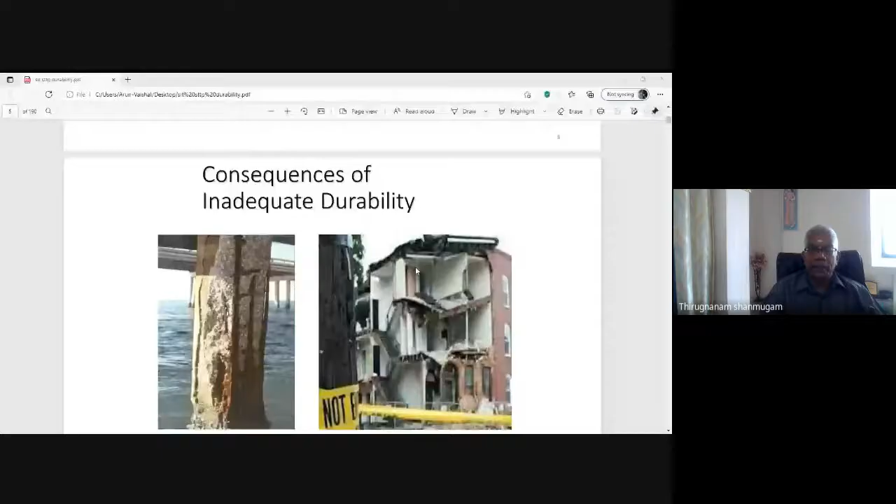Durability of concrete, advanced techniques. So what about the definition? The durability of cement concrete is defined as its ability to resist weathering action, chemical attack, abrasion, or any other process of deterioration. Concrete is normally deteriorated due to time and aggressive environment. So it is the resistance to the process of deterioration — that is the definition for durability. Durable concrete will retain its original form, quality, and serviceability when exposed to its environment.

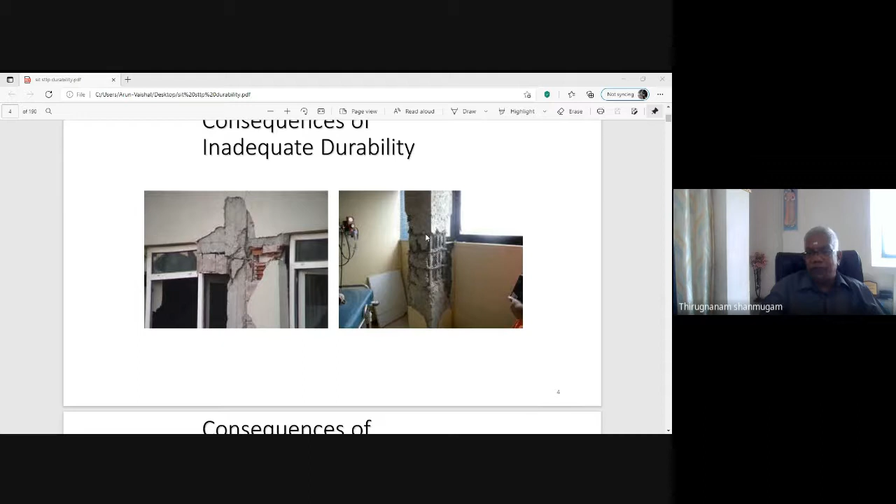These pictures show the consequences of inadequate durability. You can notice the concrete structure has been deteriorated like this — that is the lack of durability. Lack of durability causes spalling of the cover concrete, exposing the reinforcement and interior of the structure, so column bars, ties, etc. are exposed and the cover concrete is completely spalled off. This leads to corrosion of the reinforcement and finally the failure of the structure.

To achieve good durability of reinforced and pre-stressed concrete in aggressive environment, specify high cement content, low water cement ratio, suitable minimum thickness of cover to the reinforcement, and careful curing.

Higher cement content means our code of practice for plain and reinforced cement concrete, IS 456-2000, gives emphasis on durability aspects of concrete. The previous code, IS 456-1978, did not give much focus on durability, but the revised code IS 456-2000 is completely based on durability requirements.

It specifies different types of exposure conditions: mild, moderate, severe, extreme exposure, etc. It gives in tabular form the minimum cement content needed and the maximum water cement ratio. So higher cement content depends upon the exposure condition.

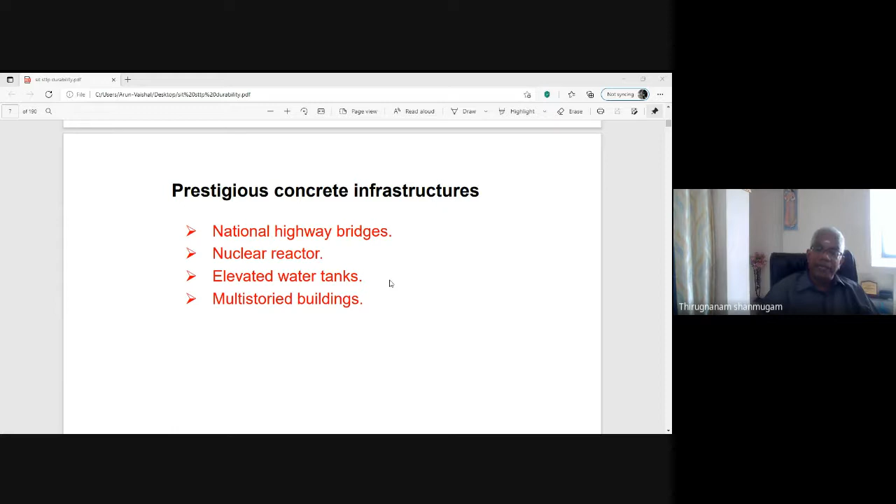So what are all the structures meant for durability? It is meant for all types of concrete structures. Out of these, the prestigious concrete infrastructures include highway bridges, nuclear reactors, elevated water tanks, multi-story buildings, etc. These are all some of the structures.

For example, Mumbai Bandra Worli Bridge is situated in the Arabian Sea in Mumbai, connecting two parts, Bandra and Worli. It is exposed to severe or extreme exposure condition because of the sea water and sea atmosphere. So you have to give importance to the durability of concrete structures.

Similarly, suspension bridges and their concrete portions have to be very carefully designed because the durability of concrete gives longer life to the bridges. Even though the cables are made with steel, steel is also subjected to corrosion. So you have to give durability consideration for the steel, the trussed girders, and the concrete also.

Nuclear reactor: normally we prefer high-performance or high-strength concrete for construction of nuclear reactors. Here, one of the durability requirements is the radiation requirement, because if the concrete is in poor condition, it is subject to radiation. The radiation emitted from the nuclear reactor will affect the people working in the nuclear power plant. So you have to build the nuclear reactor and other containment structures with radiation shielding provided. That is one of the durability requirements.

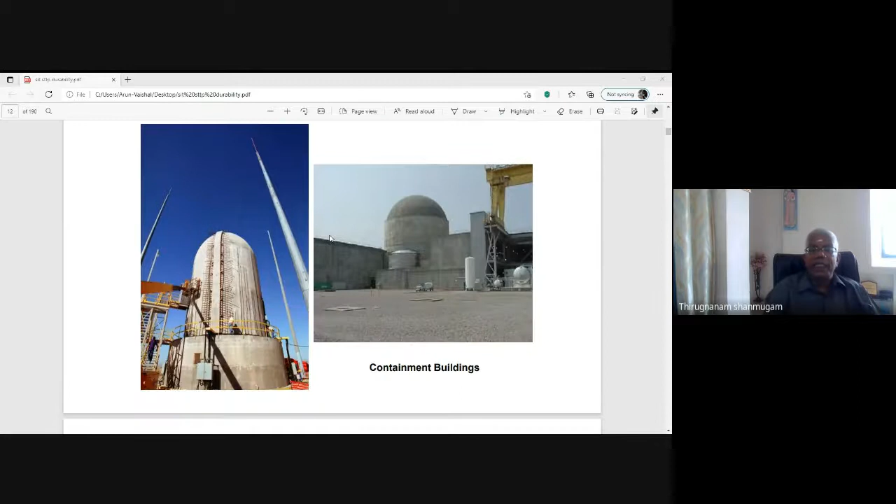This is the view of the containment structures. And multi-story buildings: nowadays multi-story buildings are very common in metropolitan cities. Recently, about a 117-story building has been constructed, or is under construction, in Mumbai.

If the height of the structure goes tall, high-rise structures etc., durability requirement is very important, because Mumbai and other metropolitans, even Calcutta and Chennai, are exposed to the sea atmosphere, as these are coastal metropolitan cities. The modern buildings constructed in cities like Bangalore, Hyderabad, Chennai, or Coimbatore have to be constructed with durable materials, steel and concrete etc.

Buildings exposed to marine environment - the marine environment means the sea atmosphere and sea water, which is a salt-laden atmosphere. These easily affect concrete structures and react with the concrete, deteriorating it. You have to give protection to the concrete structure by arresting the deterioration and disintegration of the concrete.

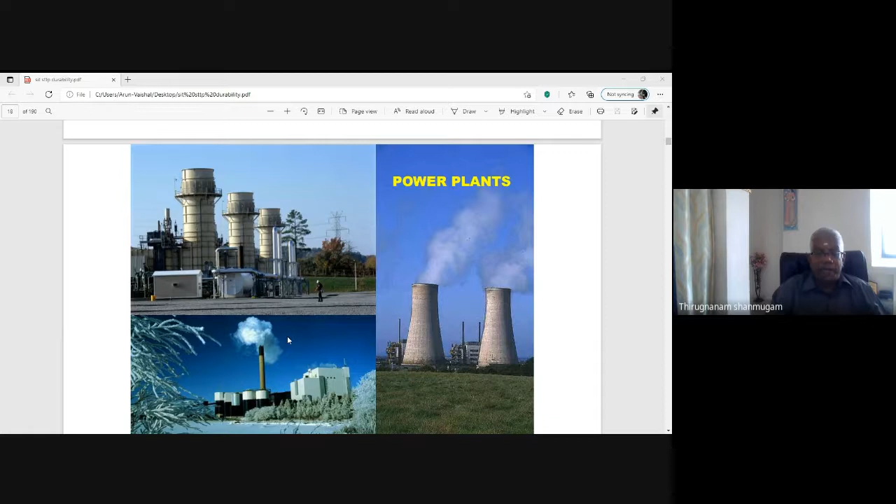Chemical plants, whether manufacturing copper, steel, organic materials, paints, or medicines etc., the chemical ingredients affect the durability of the concrete. So aggressive environment means chemical environment - these structures are exposed to the chemical environment. For example, if sulfuric acid is liberated, it affects the concrete surface and causes disintegration of the concrete structures.

So durability properties are affected by the following factors: impact of water cement ratio on durability, permeability, sulfate attack, chloride attack, corrosion of steel, carbonation of concrete, acid attack, alkali aggregate expansion or reaction, frost action, freezing and thawing action etc. These are all factors affecting the durability properties of concrete.

Let us see one by one. Effect of water cement ratio: there is tremendous change in the microstructure of concrete made with higher water cement ratio versus low water cement ratio. Nowadays SEM (scanning electron microscope) pictures are available showing the microstructure of the concrete elements. Thus we will examine the microstructure with higher and lower water cement ratio.

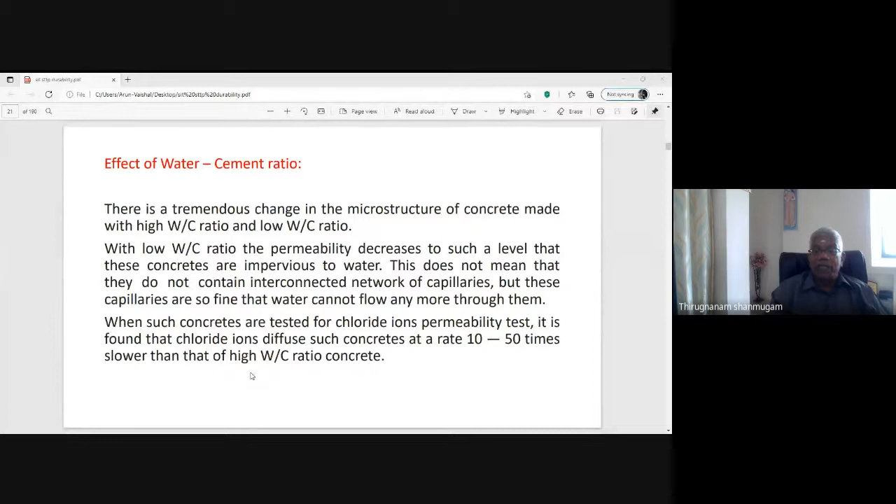Whereas with low water cement ratio concrete, along with some chemical mineral admixture, it reduces or slows the chloride ion diffusion in concrete. So the durability of the concrete is much higher, about 10 to 50 times higher.

It has been proved that low water cement ratio concrete is less sensitive to carbonation, external chemical attack, and other detrimental effects that cause lack of durability of concrete. It has been reported that it becomes impossible to corrode unprotected steel reinforcement in accelerated corrosion tests of concrete with very low water cement ratio, because of the imperviousness of the concrete surface. So when you do accelerated corrosion tests, it is also proved that the rate of corrosion is very, very less when adopting low water cement ratio.

Similarly, with low water cement ratio, you can increase the resistance against carbonation, sulfate attack, chloride attack, alkaline attack, etc., and other detrimental effects which cause lack of durability of concrete. So it could be inferred that the best way to protect reinforcing steel against corrosion is to use low water cement ratio and adequate cover, rather than using higher water cement ratio and then protecting the steel by epoxy coating.

In this context, the strength and workability criteria are completely reversible. If you want strength, you have to reduce the water cement ratio. But reducing the water cement ratio also reduces the workability. So in order to get sufficient workability in place of the concrete, you have to maintain some quantity of water, that is, a higher water cement ratio.

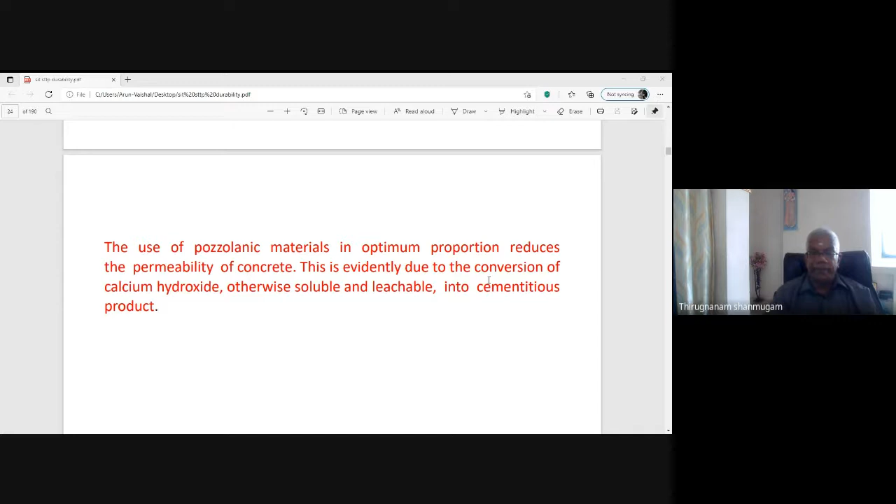Plastic shrinkage cracks occur because water from fresh concrete can be lost by evaporation, absorption by the subgrade, formwork, and the hydration process. During pouring, water is lost by evaporation and by absorption into the subgrade, formwork, and through the hydration reaction of the cement.

A minimum amount of water is needed for completing the hydration action of the cement paste, about 0.25 to 0.3. This amount of water is completely needed and should be available at all times until 100% hydration has taken place. So we have to take care of evaporation loss, absorption loss, etc., by slightly increasing the water content, to 0.35 or 0.4.

If water is lost by evaporation or absorption, the minimum amount of water must still be present for the setting action, that is the hydration action. Otherwise, you have to take care of or arrest the evaporation loss, absorption, formwork loss, or temperature loss.

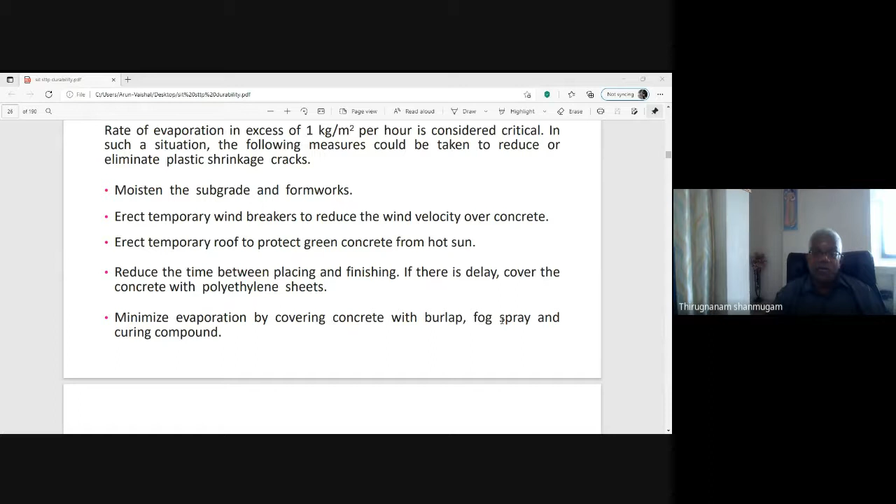Fog is sprayed over the surface of the concrete to reduce the temperature, for the effect of curing. Modern high-grade cement, being finely ground with higher tricalcium silicate content, needs early curing, particularly in

hot weather conditions. If you use OPC 53 grade cement, the fineness of the cement is much more. Because of this, the surface area of the cement particles is very high, and the tricalcium silicate - you can notice the 4 Bogues compounds: dicalcium silicate, tricalcium silicate, calcium aluminate, calcium aluminoferrite, etc. Out of these, tricalcium silicate is important for the strength and protection.

So with higher C3S content, early curing is needed. Early curing means starting the curing after 6 or 8 hours. Normally in practice, we adopt curing after 24 hours or 20 hours, but it is not sufficient for higher C3S content. So you have to start curing early, within 10 hours, especially in hot weather conditions.

Structural members which are thin, with a large surface to volume ratio, such as sun breakers, chajja, etc., need early curing. So if the surface area of the concrete is large, you have to start curing as early as possible.

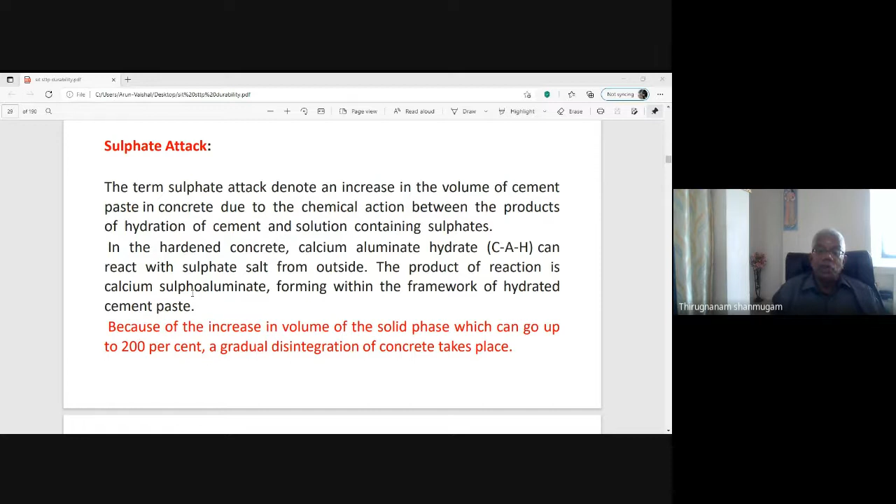Because of the increase in volume of the solid phase - this is calcium sulfoaluminate - which can go up to 200%, a gradual disintegration of the concrete takes place.

The rate of sulfate attack increases with the increase in the strength of the solution. If the external solution is rich in sulfate content, the rate of sulfate attack is greater. A saturated solution of magnesium sulfate can cause serious damage to concrete with a higher water cement ratio in a short period of time.

However, if the concrete is made with low water cement ratio, the concrete can withstand the action of magnesium sulfate for 2 to 3 years. So magnesium sulfate is one of the chemical attacks on concrete in the chemical industries. So if you want durability of the concrete, you have to go for low water cement ratio. Otherwise, if you adopt higher water cement ratio, within a very short time, say after 6 months or 1 year, the concrete is completely disintegrated and deterioration takes place. The concrete is having no durability, lack of durability.

The concentration of sulfate is expressed as the number of parts by weight of sulfate SO3 per million parts. 1000 ppm is considered moderately severe, and 2000 ppm is considered very severe, especially if MgSO4, magnesium sulfate, is the predominant concern. The magnesium sulfate salt normally comes through the water, so the water is strictly subjected to quality control. If the mixing water or curing water contains more than 1000 ppm of sulfate ions, it should not be used, because it is considered moderately severe, and if it exceeds 2000 ppm, very severe, causing deterioration of the concrete.

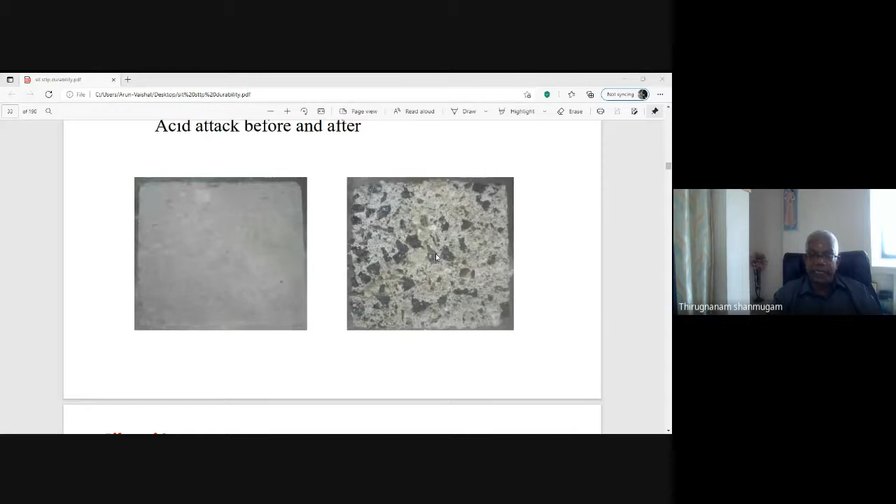This may be seen in this video. This is the surface of the concrete. If the concrete is attacked by hydrochloric acid or any other strong acid, the cement paste is completely leached away, exposing the fine aggregate and coarse aggregate. This concrete is completely deteriorated and it will not give durability.

With sulfuric acid attack, calcium sulfate is formed and can proceed to react with the calcium aluminate phase in cement to form calcium sulfoaluminate, similar to sulfate attack, which on crystallization can cause expansion and disruption of the concrete.

If acid solutions can reach the reinforcing steel through cracks or porosity of concrete, corrosion can occur, which will cause cracking. That is one of the major points in acid attack or chemical attack, sulfate attack, etc. It reaches the reinforcing steel through cracks or porosity of the concrete, so corrosion occurs, which causes cracking of the structure and finally failure of the structure.

Effect of seawater. Rich concrete with low water cement ratio mainly makes the concrete impervious to attack of seawater, and having very little capillary pores does not hold water to cause expansion either by freezing or by crystallization of salt. Rich concrete means cement content is higher. High cement content with low water cement ratio mainly makes the concrete impervious to water as well as to attack of seawater, and having very little capillary pores does not hold water to cause expansion either by freezing or by crystallization of salt.

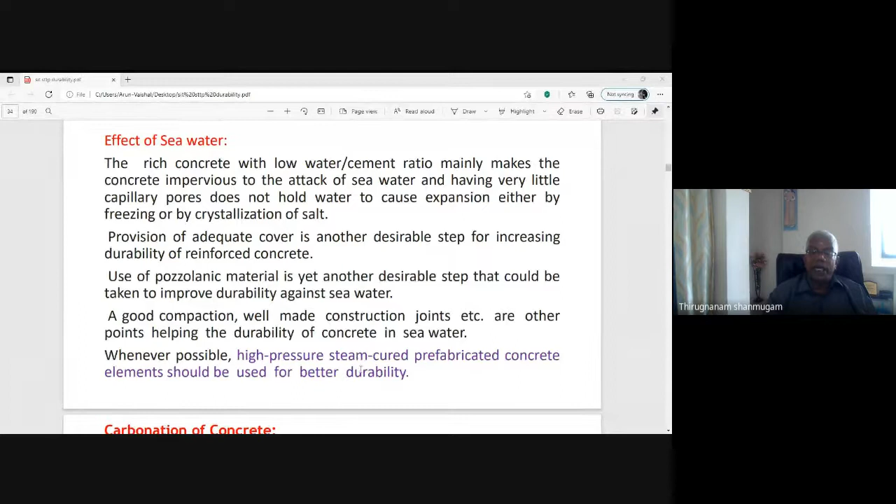High pressure steam cured prefabricated concrete elements should be used for better durability. Prefabricated means the quality of the concrete is very good, and high pressure steam curing means it attains strength as early as possible. 1 or 3 days curing is sufficient to achieve 100% hydration action of the cement, so it should be used for better durability.

Next, carbonation attack on concrete. In the presence of moisture, carbon dioxide present in atmospheric air reacts with water and changes into dilute carbonic acid, which attacks the concrete and reduces its alkalinity.

Normally, the concrete has a pH value of about 13. By carbonation of the concrete, this pH value is reduced to 9 or 8, etc. The pH value of the pore water in the concrete is generally between 12.5 to 13.5, depending upon the alkali content of the cement.

The high alkalinity forms a thin passivating layer around the steel reinforcement and protects it from the action of oxygen and water. This protects the concrete and the steel from corrosion.

If steel is placed in a highly alkaline condition, it is not going to corrode. Such a condition is known as passivation.

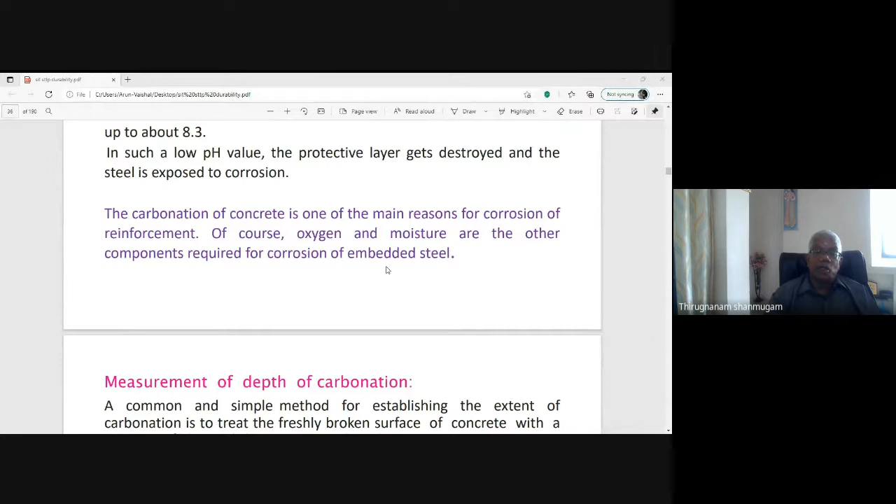Measurement of depth of carbonation: a common and simple method for establishing the extent of carbonation is to treat the freshly broken surface of concrete with a solution of phenolphthalein in diluted alcohol.

If the calcium hydroxide is unaffected by carbon dioxide carbonation, the color turns out to be pink. So pink color formation denotes a very good concrete.

If the concrete is carbonated, it will remain uncolored. So uncolored concrete means the color change is not there, meaning the concrete has been subjected to carbonation, leading to disintegration or corrosion of the reinforcement, etc.

It should be noted that the pink color indicates that enough calcium hydroxide is present, but it may have been carbonated to a lesser extent. So if carbonation is there, it is to a lesser extent and will not lead to corrosion of the reinforcement. The pink color indication is very, very important, and it will show even up to a pH value of about 9.5 or 10.

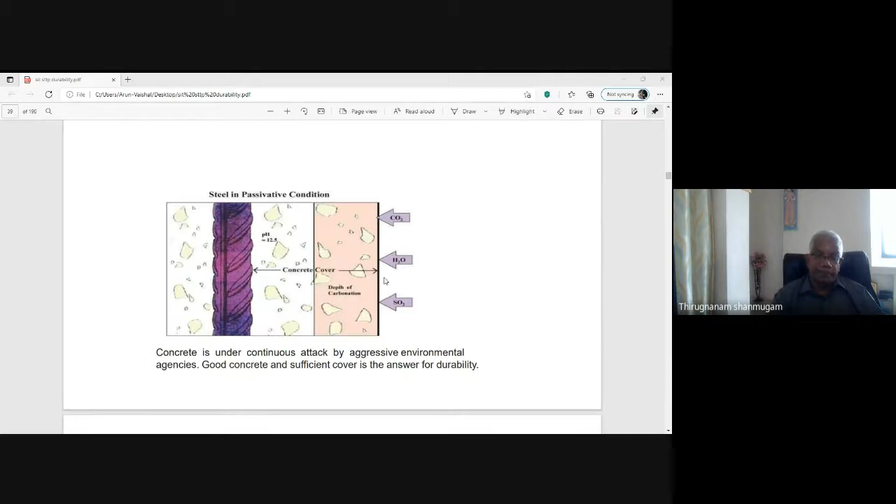Chloride attack is one of the most important aspects for consideration when we deal with the durability of concrete. Chloride attack is particularly important because it primarily causes corrosion of reinforcement.

Statistics have indicated that over 40% of the failure of concrete structures is due to corrosion of reinforcement.

So if you arrest the chloride attack or enhance the durability of the concrete, corrosion of reinforcement is not possible. Once the steel is in a passivative condition or the concrete is in a durable condition, there is no failure of the structure. The structure has a very long life, about 100 years, etc.

So in order to prevent the failure of the structure, you have to avoid the corrosion of reinforcement by providing durable concrete, etc. Due to the high alkalinity of concrete, a protective oxide film is present on the surface of steel reinforcement.

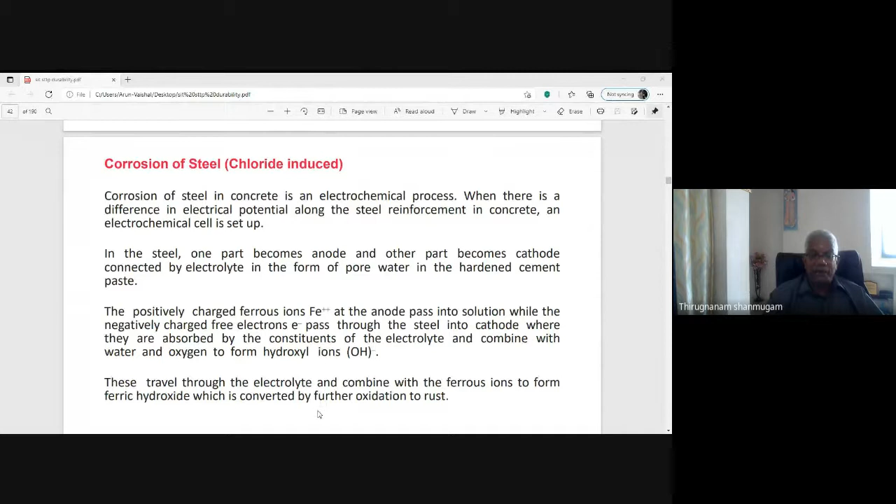So that is the corrosion mechanism. The steel reinforcement, one part is taken as anode and another part is considered as cathode. So anode to cathode and cathode to anode, the current is passing, that is the potential is forming, that produces OH hydroxyl ions in the presence of chloride ions, chloride inducing corrosion.

These are the medium necessary for inducing the reaction, that is oxygen and water. This will include the reaction of the hydroxyl ion, which is flowing through and forming ferrous oxide to ferric oxide, etc., thus causing the rusting of the steel.

It can be noted that no corrosion takes place in concrete that is dry, or probably below relative humidity of 60%, because enough water is not there to promote corrosion. As mentioned earlier, water is a medium necessary for promoting the reaction. So if humidity is below 60%, there will be no corrosion reaction, or you have to maintain the concrete in a dry condition.

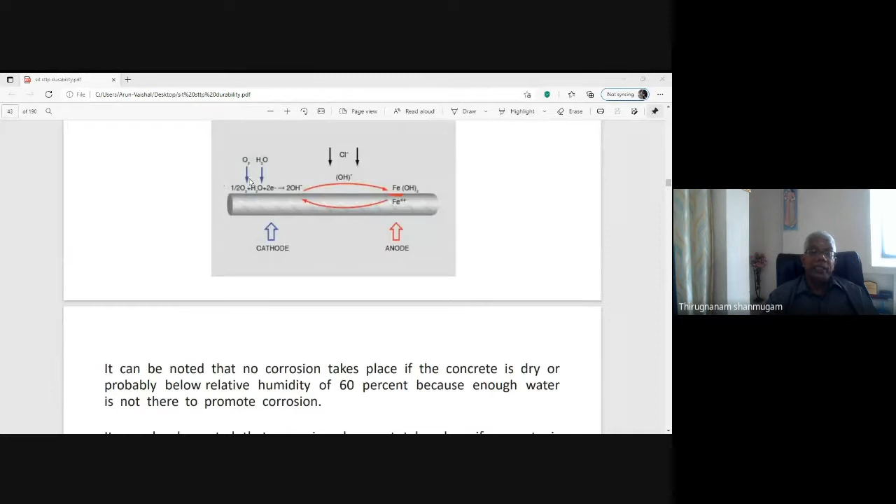It can also be noted that corrosion does not take place if concrete is fully immersed in water, because diffusion of oxygen does not take place into the concrete. Apart from the medium of water, you require another medium, that is oxygen. So if the concrete is completely immersed in water, diffusion of oxygen from the atmosphere into the concrete does not take place. If there is no oxygen, the reaction of the hydroxyl ion is not produced, so corrosion of the steel reinforcement is not possible.

You may think that if reinforced cement concrete is completely immersed in water, there may be corrosion taking place, but corrosion is not taking place because diffusion of oxygen is prevented. There is no oxygen present in the concrete to promote the reaction. Probably the optimum relative humidity for corrosion is 70 to 80%.

The product of corrosion occupies a volume as many as 6 times the original volume of the steel, depending upon the oxidation state. So once rust is formed and graduates into corrosion and corroded steel, the volume of the corroded steel is about 6 times increased. This 6 times increase in volume means the surrounding concrete is completely disintegrated, fallen off, and exposure to external agents is easily possible.

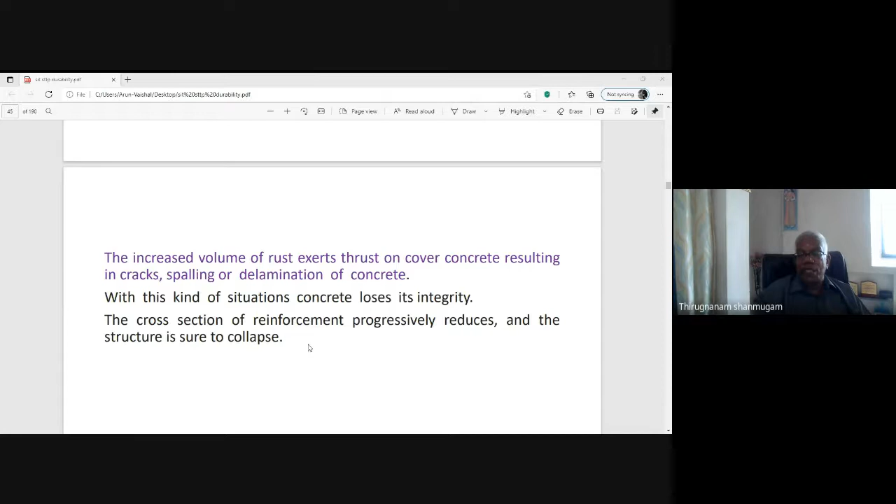The increased volume of rust exerts thrust on the cover concrete, resulting in cracks, spalling, or delamination of concrete. With this situation, concrete loses its integrity and the cross-section of the reinforcement progressively reduces, and the structure is sure to collapse. The cross-section reduces because the diameter reduces from 12 mm to 8 mm, and an 8 mm rod cannot satisfy the load carrying capacity, so the structure fails.

These rust products or corroded products are causing cracks and spalling of the cover concrete. So water, oxygen, carbon dioxide, or other external agents easily attack the surface of the steel. The steel surface is not protected, so corrosion of steel is taking place, and very soon failure of the structure is expected because of the corrosion.

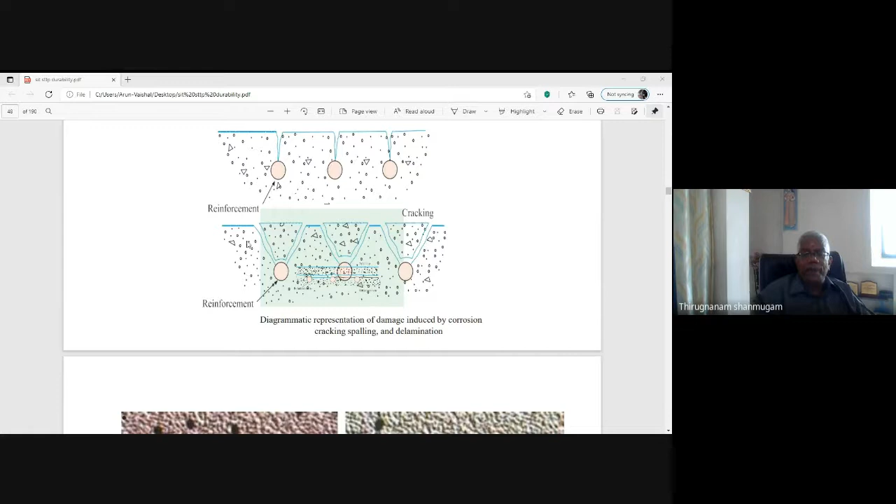Another diagrammatic representation like this. Reinforcement corrosion causes cracking and spalling of the concrete. Finally, delamination takes place, this portion is completely removed, and the steel reinforcement is exposed.

Electromicrograph showing corrosion in poor concrete. If the concrete is poor, chloride ions, carbon dioxide, water, oxygen, etc. are present, and rusting of the steel reinforcement takes place, causing corrosion. The color of the reinforcement changes to reddish.

The same electromicrograph shows no corrosion in good concrete. If the concrete is good, there are no porous sections or capillary pores permitting chloride ions, carbon dioxide, water, oxygen, etc. to enter. So the steel reinforcement is completely protected by this passive film or passive layer, with no external agents. Your steel remains as it is, with no corrosion present.

This photograph represents delamination of the cover concrete. The cover concrete is completely eliminated, and the steel reinforcement cracks due to bursting pressure from rusting of the reinforcement. Example of delamination of the concrete cover on a roof slab. This concrete cover is about 15 mm.

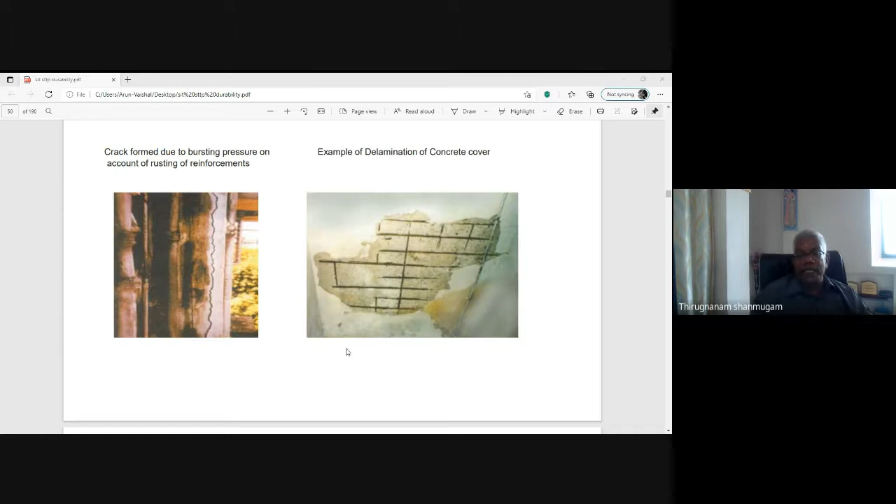Another diagram showing induced corrosion, with cracking and spalling of the concrete, etc. This is the condition of corrosion-ravaged columns. From literature survey and case studies, it has been reported that 40% of structural failures are on account of corrosion of the embedded steel reinforcement in concrete.

Therefore, corrosion control of steel reinforcement is of paramount importance. 40% of failures are due to corrosion, so corrosion control is a very important criterion. First and foremost for corrosion control is good quality concrete through good construction practices.

It is a vast subject touching the fundamentals of choosing constituent materials and good rules to be followed at various stages in the production of concrete. In particular, the use of the lowest possible water cement ratio, having regard to workability, in view of the general availability of superplasticizers, should be used to cut down the water cement ratio and make dense concrete. Normally, according to IS 456 or IS 10262 code practices, 20 mm aggregate requires about 188 liters of water.

That is 188 liters of mixing water. If you use superplasticizer, you can reduce water by 20%. So only 150 liters or 150 kg per cubic meter of water is sufficient for making the concrete. If water is reduced, the water cement ratio is automatically reduced.

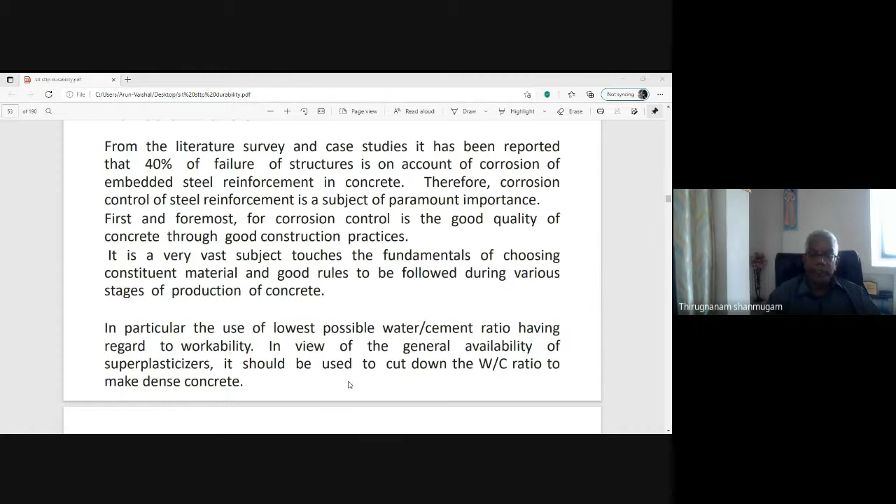This produces good quality concrete for durability purposes. It should be used to cut down the water cement ratio to make dense concrete. Proper mix design, and use of the right quality and quantity of cement for different exposed conditions, should be adopted.

Use of supplementary cementitious materials such as fly ash, ground granulated blast furnace slag (GGBS), silica fume, microsilica, etc. are required, used as admixture mineral mixtures or in the form of blended cement, PPC or blended cement, in addition to the lowest possible water cement ratio to make the concrete dense. So this is the condition.

Use of supplementary cementitious materials or blended cement is required along with lower water cement ratio to make dense or impervious concrete. These materials improve more than one property of concrete, which eventually reduces corrosion of reinforcement. Tests on concrete or mortar containing GGBS have shown that water permeability is reduced by a factor of 100.

So permeability is 100 times lesser; the concrete is completely impervious. It is also reported that 60% GGBS reduces the diffusion of chloride ions into the concrete by as much as 10 times. Chloride ion ingress is also reduced by about 10 times.

Silica fume contributes to all-around improvements in the quality of concrete, which are responsible for reducing corrosion of the steel reinforcement. The micropore structure is very much improved by adding silica fume, which has very, very small micron-sized particles, so corrosion is automatically reduced.

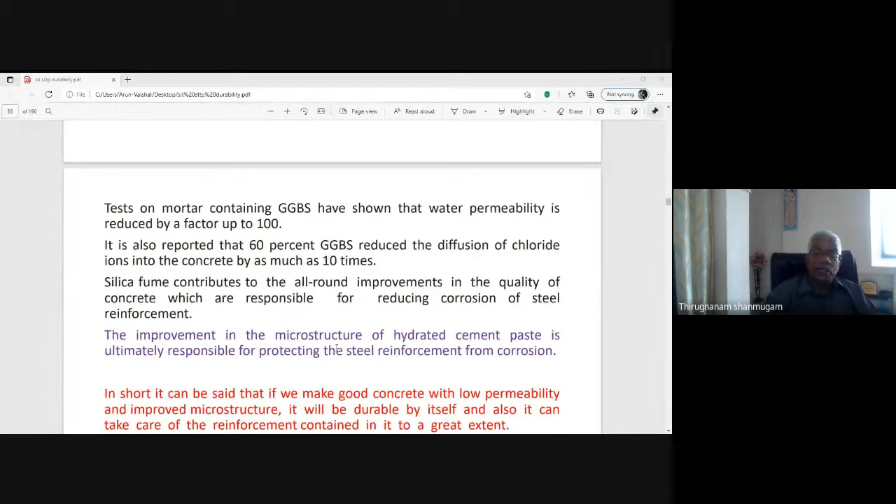The improvement in the microstructure of the hydrated cement paste is ultimately responsible for protecting the steel reinforcement from corrosion.

In short, if we make good concrete with low permeability and improved microstructure, it will be durable by itself and can also protect the reinforcement contained in it to a great extent. If you want longer life of the structure, about 100 or 200 years, you have to prevent corrosion of the steel reinforcement. This will be done by durable concrete—good concrete with low permeability and improved microstructure. That is durable concrete.

It is not always possible to make such ideal concrete, particularly in view of complex environmental and exposure conditions. Further, inherent long-term drying shrinkage and microcracks in concrete make the problems more serious. This demands certain other measures to control corrosion of steel reinforcement.

They are listed as below: metallurgical methods, corrosion inhibitor method, coatings to reinforcement, cathodic protection method, coatings to concrete, and design and detailing. These are the corrosion control methods. We will see them one by one.

Metallurgical methods: steel can be made more corrosion resistant by altering its structure through metallurgical or mechanical processes. Different methods such as rapid quenching of hot bars by a series of water jets, or keeping hot steel bars for a short time in a water bath, and other such processes, can improve the mechanical properties and corrosion resistance of the steel. These are quenching and tempering, etc.—the mechanical or metallurgical processes to improve the properties of steel.

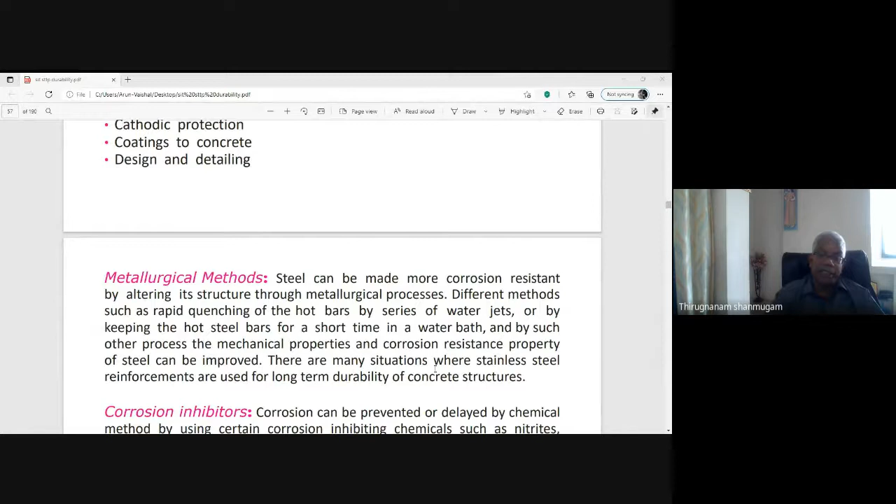The next method is corrosion inhibitor. Corrosion can be prevented or delayed by chemical methods using certain corrosion-inhibiting chemicals such as nitrites, phosphates, benzoates, etc. Of the available materials, the most widely used admixture is based on calcium nitrite.

It is added to the concrete during mixing. The typical dosage is 10 to 30 liters per cubic meter of concrete, depending on the chloride levels in the concrete. One corrosion inhibitor is calcium nitrite. Adding this inhibitor during mixing helps the corrosion resistance mechanism of the concrete.

As mentioned earlier, at high pH the steel is protected by a passivating layer of ferric oxide on its surface. However, this passivating layer also contains some ferrous oxide, which can initiate corrosion when chloride ions reach the steel. The nitrite ions present in the corrosion-inhibiting admixture oxidize this ferrous oxide to ferric oxide, thus stabilizing the passivating layer even in the presence of chloride. So the ferrous oxide is completely converted into ferric oxide by these calcium nitrite ions, stabilizing the passivating layer—meaning there is no corrosion, no chloride attack, no chloride diffusion. The concentration of nitrite must be sufficient to cope with the continuing ingress of chloride ions.

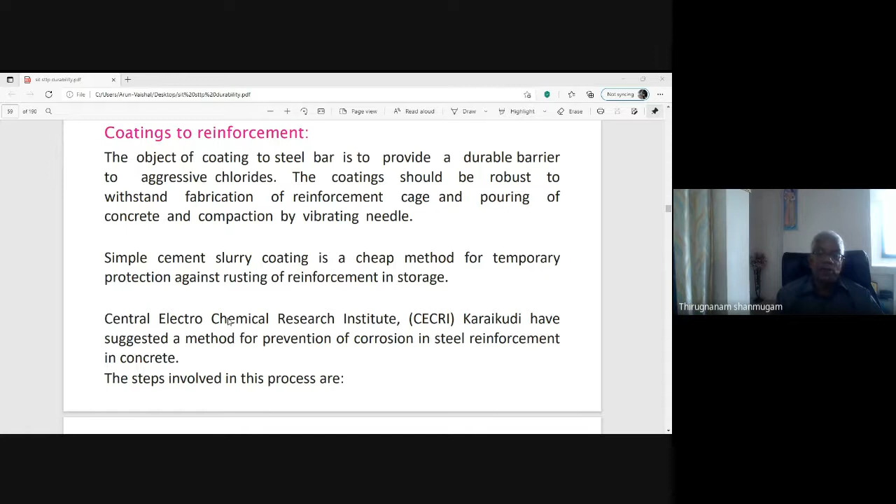Simple cement slurry coating is a cheap method for temporary protection against rusting of reinforcement in storage. The Central Electrochemical Research Institute, Karaikudi, has suggested a method for prevention of corrosion of steel reinforcement. The steps are: de-rusting, phosphating, cement coating, and sealing.

De-rusting: the reinforcements are cleaned with a de-rusting solution. This is followed without delay by cleaning the rods with a wet cloth and cleaning powder. The rods are then rinsed in running water and air-dried.

Phosphate jelly is applied to the bars with a fine brush. The jelly is left for 45 to 60 minutes and then removed with a wet cloth. An inhibitor solution is then brushed over the phosphated surface. For cement coating, a slurry is made by mixing the inhibitor solution with Portland cement and applied on the bar. A sealing solution is brushed on after the rods are air-dried, which has an inside curing effect.

The second coat of slurry is then applied and the bars are air-dried. This cement slurry coating is made by mixing the inhibitor solution with Portland cement and applying it to the bar.

2 coats of sealing solution are applied to the bars in order to seal the micro pores of the cement coat and make it impermeable to corrosive salts. This is the view of the cement polymer composite coated rebars. These polymer coated rebars are stored in the storage yard and then used for fabrication of steel reinforcement for making RCC structures.

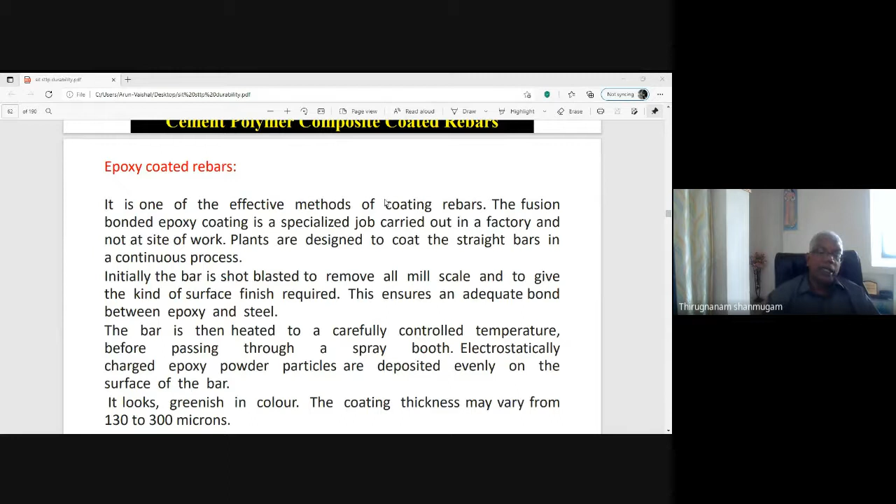The bar is then heated to a carefully controlled temperature before passing through a spray booth. Electrostatically charged epoxy powder particles are deposited evenly on the surface of the bar. It looks greenish in color. The coating thickness may vary from 130 to 300 microns. The thickness of the coating is about 150 microns, 0.15 mm.

Another technique is galvanized reinforcement. Galvanizing of reinforcement consists of dipping the steel bars in molten zinc. This results in a coating of zinc bonded to the surface of the steel. The zinc surface reacts with calcium hydroxide in the concrete to form a passive layer and prevents corrosion. That is why GI steel is provided for the reinforcement.

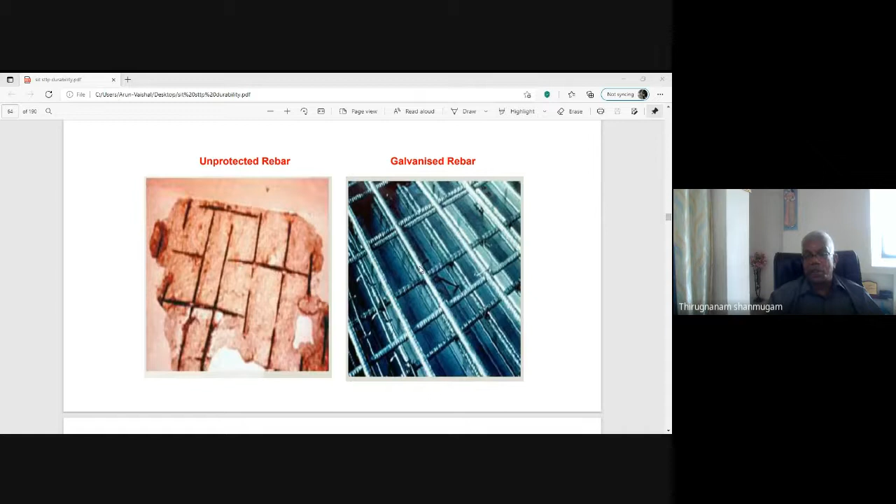In unprotected steel reinforcement, corrosion takes place and spalling of concrete exposes the reinforcement, with rust formed on it. If you provide galvanized steel, there is no corrosion and no rusting action, because of the strong passivity layer provided by the zinc reacting with the calcium hydroxide solution liberated from the hydration and setting action of the cement.

Another method is cathodic protection. It is one of the effective, well-known and extensively used methods for prevention of corrosion in concrete structures in more advanced countries. Due to high cost and the long-term monitoring required, it is not much used in India. Cathodic protection comprises application of impressed current to an electrode laid on the concrete above the steel reinforcement. This electrode serves as a sacrificial anode, and the steel reinforcement, connected to the negative terminal of a DC source, acts as a cathode.

In this process, the external anode is subject to corrosion while the cathodic reinforcement is protected, hence the name cathodic protection, also called sacrificial anode. You provide a sacrificial anode above the reinforcement, and it is completely washed out over time. You have to replace it once in 2 or 3 years, so periodical monitoring is done and the cathodic protection is replaced or provided accordingly.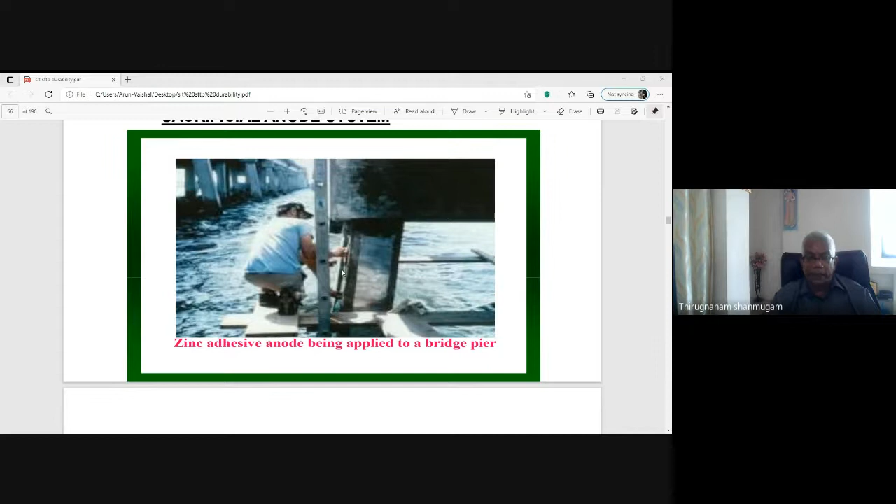In addition to coating the reinforcement, a surface coating is given to the concrete member to increase the durability of all. The coating serves the dual purpose of protection and decoration. Giving protective coatings to major concrete structures such as bridges, flyovers, industrial buildings, and chimneys has become a common specification in India as in other countries. Nowadays, concrete bridges, flyovers and other buildings have decorative coatings.

This protective coating prevents the ingress of external agents, so the durability of concrete is improved. A 4-kilometer long bridge on a national highway at Cochin was recently coated with Emcecolor Flex, a material manufactured by MC Bauchemie Limited. Nowadays, all bridges are coated with these materials.

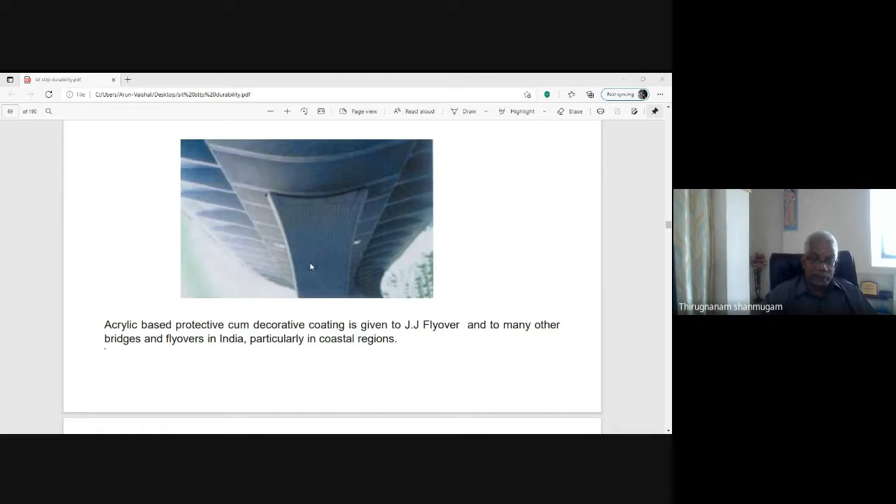So the coating is done on the concrete surface by these people. This is the view of the coating. Acrylic-based protective decorative coating is given to the JJ flyover and many other bridges and flyovers in India, particularly in coastal regions, and also in other areas, to increase the durability of the concrete.

Design and detailing: the structural designer should take all precaution in designing and detailing with respect to spacing between bars for concrete flow between reinforcement, to facilitate vibration of concrete, to give proper cover to the steel reinforcement, and to restrict crack width. You have to follow strictly the codal provisions for detailing of reinforcement according to IS 456 or IS 13920, and strictly adhere to the spacing between the main bars, spacing between stirrups or tie bars, etc.

It facilitates the vibration of concrete to give proper cover to the steel reinforcement, and to restrict the crack width. Closer spacing of the reinforcement means the crack width is automatically reduced.

Nominal cover to reinforcement is applicable to all steel reinforcement, including links. For longitudinal reinforcing bars in a column, nominal cover in any case should not be less than 40 mm or less than the diameter of the bar.

In the case of columns of minimum dimension 200 mm or under, where reinforcing bars do not exceed 12 mm, a nominal cover of 25 mm will be used. So for a slab, if the bar is not exceeding 12 mm diameter, 25 mm cover is sufficient. If the bar diameter is 16 mm or 25 mm, a 40 mm cover is needed, with minimum dimension of 200 mm.

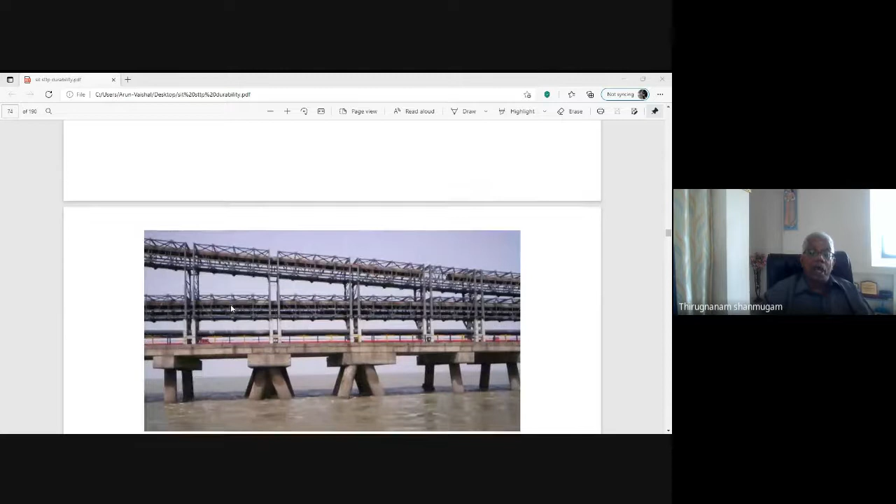What is the importance of corrosion in concrete structures? Consider the concrete platform for conveyor belts and pipelines across the sea for thermal power plants or offshore platforms, for transporting oil, etc. Sometimes the bridge is movable for vehicles, and when vehicles move, cracks develop, and in addition to the seawater, corrosion occurs. So concrete platforms subjected to corrosion activities have high crack widths.

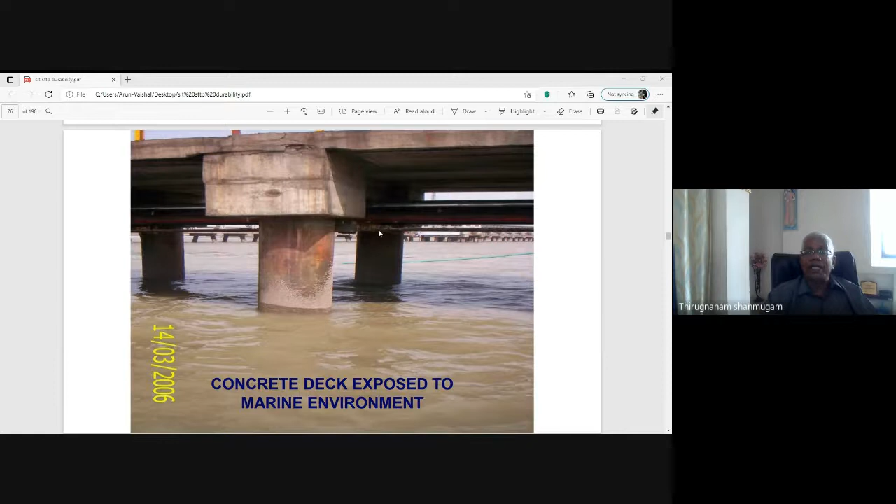Because concrete decks are exposed to marine environments, corrosion takes place, and severe cracks develop at the concrete surface. You have to avoid these cracks. Once the crack widths and corrosion of the steel reinforcement go unnoticed for a long time, finally the failure of the structure takes place due to corrosion of the steel reinforcement.

On the corroded deck, the steel reinforcement becomes visible, and over a period of time it loses its capacity, and finally failure takes place.

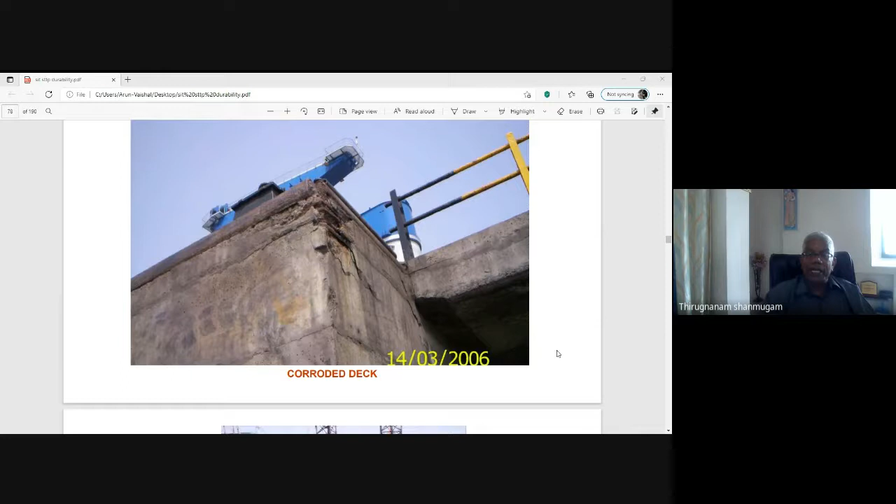Normally, the construction of concrete piles in seawater will be subjected to chloride attack from the sodium chloride ions present in the seawater, so you have to use only durable concrete.

These are some of the experimental investigations taken up at IRTT. One PhD thesis under my guidance is on durability of transmission line tower foundations, done by Christian Johnson. The methodology adopted is design of concrete mix of M20 grade with mineral admixtures to increase the durability of concrete. The specimens are subjected to accelerated corrosion testing to find the initiation of the corrosion period and the corrosion level damage.

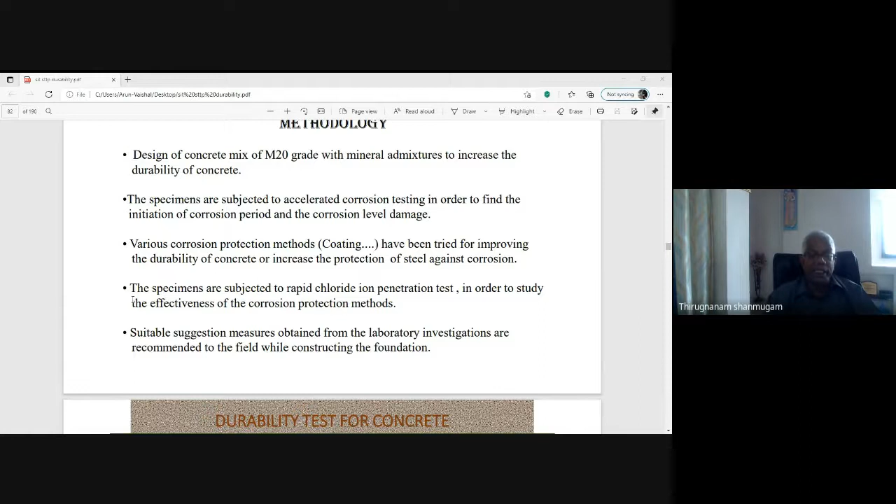Various corrosion protection techniques, such as coatings, have been tried for improving the durability of concrete and increasing the protection of steel against corrosion. The specimens are subjected to rapid chloride ion penetration tests (RCPT) to study the effectiveness of the corrosion protection method, because chloride-induced corrosion is very, very dangerous, and this can be experimented using RCPT tests.

Suitable suggested measures obtained from the laboratory investigations are recommended to the field while constructing the foundation of the transmission tower line.

The specimen is fixed between the two reservoirs using an epoxy bonding agent to make the test setup watertight.

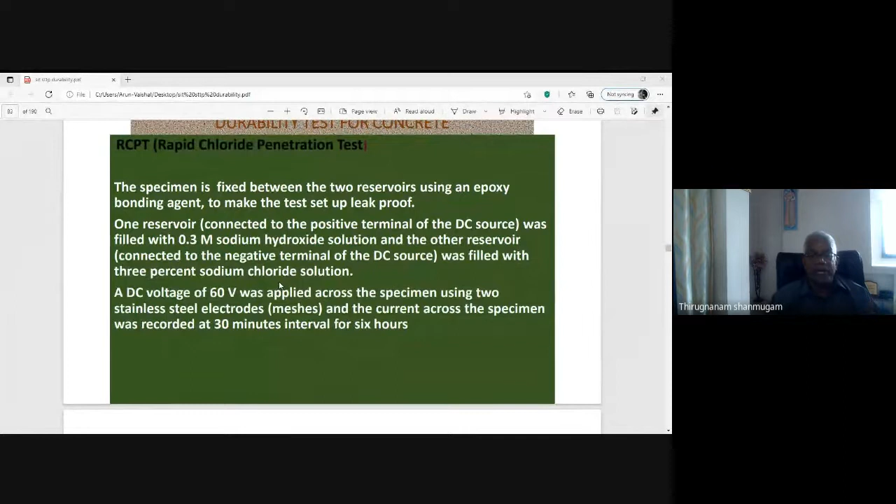One reservoir is connected to the positive terminal of the DC source and filled with 0.3 molar sodium hydroxide (NaOH) solution. The other reservoir is connected to the negative terminal and filled with 3% sodium chloride (NaCl) solution. So there will be a diffusion of chloride ions from one portion to another via the concrete.

A DC voltage of 60 volts was applied across the specimen using two stainless steel electrodes, and the current across the specimen was recorded every 30 minute interval for 6 hours.

Because of this, a chemical reaction takes place and chloride is transferred from this place to that place via the concrete. So the concrete is subjected to chloride ion penetration. That is why it is called the rapid chloride permeability test, RCPT.

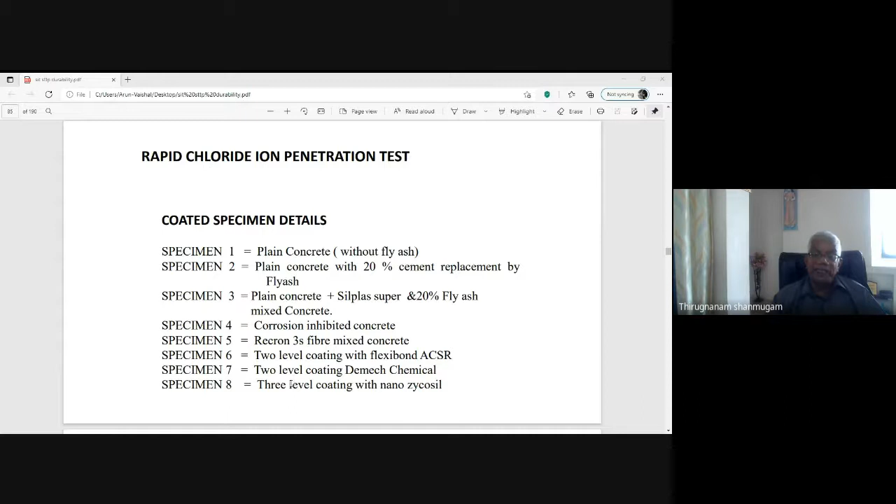Specimens 6 and 7 are provided 2-level coating with Flexibond ACSR, Demech coating on the steel reinforcement as well as on the concrete surface. And there is 3-level coating with nano Zycosil, where the concrete surface is coated with nano Zycosil, the steel surface is coated with another material, and the concrete itself is mixed with mineral and chemical admixtures. That is the 3-level coating.

For the RCPT test, the specimens are cut into small pieces, 100 mm diameter and 50 mm thickness. Here is a closer view of the specimen. These are the specimens with different coatings, placed on the test setup like this.

Now the voltage is applied and the current is passed. The current is measured every 30 minutes, in milliamperes, using a multimeter or impedance meter, up to 6 hours, 360 minutes.

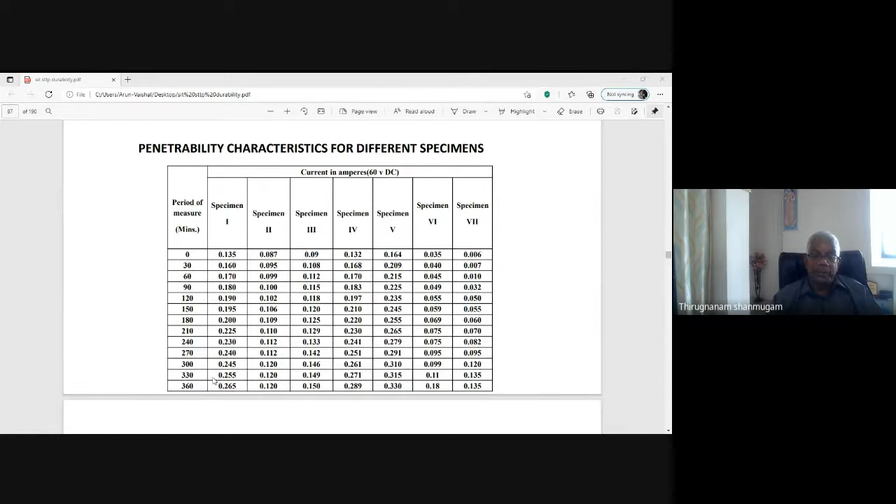The total charge passed during this period was calculated in terms of coulombs using the trapezoidal rule as given in the relevant standard: Q equals 900 times (I0 plus twice I30 plus twice I60 plus ... ) up to the last reading, where Q is the charge passed, I0 is the current immediately after the voltage is applied, and IT is the current at T minutes after the voltage is applied, such as I30 at 30 minutes, I330 at 330 minutes, and so on. This gives the total charge passed in coulombs.

There is a standard given for this test. If the charge passed is above 4000 coulombs, there is high permeability and high penetrability of chloride ion, meaning durability is very low and chloride ions easily penetrate the concrete. 2000 to 4000 is moderate penetrability, 1000 to 2000 is low permeability, 100 to 1000 is very low permeability, and less than 100 is negligible. This is the standard. So we should design concrete with negligible or very low permeability, and avoid high or moderate permeability.

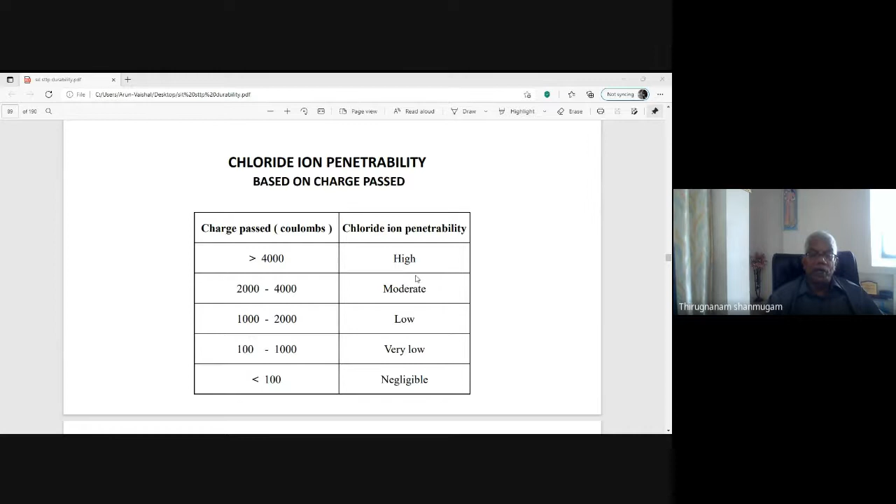Our experiment shows that for the controlled specimen, the total charge passed is about 4000, indicating high penetrability.

If admixture is used, there is slightly less, moderate permeability, around 2000. If both mineral admixture and superplasticizer or chemical admixtures are used, it gives more or less the same result, around 2000, moderate penetrability. If corrosion inhibitor is used, it does not affect chloride ion penetrability at all; it is only for corrosion resistance, not chloride ion penetration, so once again high penetrability is observed.

When Recron 3S polyester fibers are added, this also does not improve resistance to penetrability. In fact it is much higher because of the large number of voids created, making permeability much higher than conventional concrete, and hence the Q value much higher, indicating high permeability and penetrability.

But if you provide 2-level or 3-level coatings, the values fall under the low category, less than 2000. Using nano Zycosil brings penetrability below 1000, which is very low and good. So specimen 8, with 3-level coating using nano Zycosil, is adopted for highly aggressive environment regions to protect the steel products.

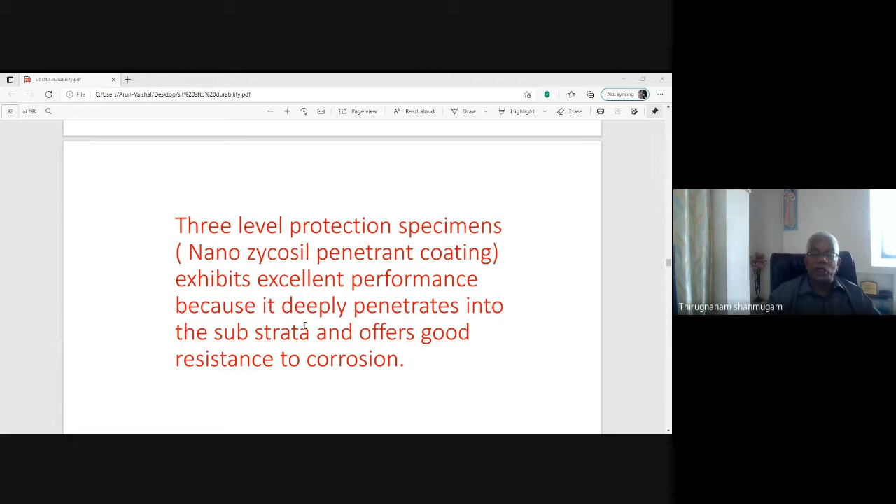Accelerated corrosion test: the half cell is a hollow tube containing a copper electrode immersed in copper sulfate solution. The bottom of the tube is open and covered with a sponge material. The copper sulfate solution permeates through the sponge, which can then be placed on a concrete surface, allowing the electrical potential to be measured.

The objective of the method is to measure the voltage difference between the rebar and the concrete over the rebar. Large negative voltages, minus 350 millivolts, indicate that corrosion may be taking place. Voltages smaller than 200 millivolts generally mean corrosion is not taking place. A typical half cell setup is shown in the figure.

This is a view: concrete surface, reinforcing bar. This reinforcing bar is connected by means of a wire to the high impedance voltmeter's positive terminal. The surface of the concrete has this half cell potentiometer, sponge material for the penetration of the fluid, and this electrode is connected to the negative terminal.

So there is an indication in millivolts. This is the multimeter or voltmeter; it gives the indication. This is the half cell potentiometer setup.

Now, the specimens are concrete specimens, cylindrical concrete specimens cast with steel angles or steel rods embedded up to a certain depth. These steel rods are connected by means of wires to the positive terminal of the voltmeter.

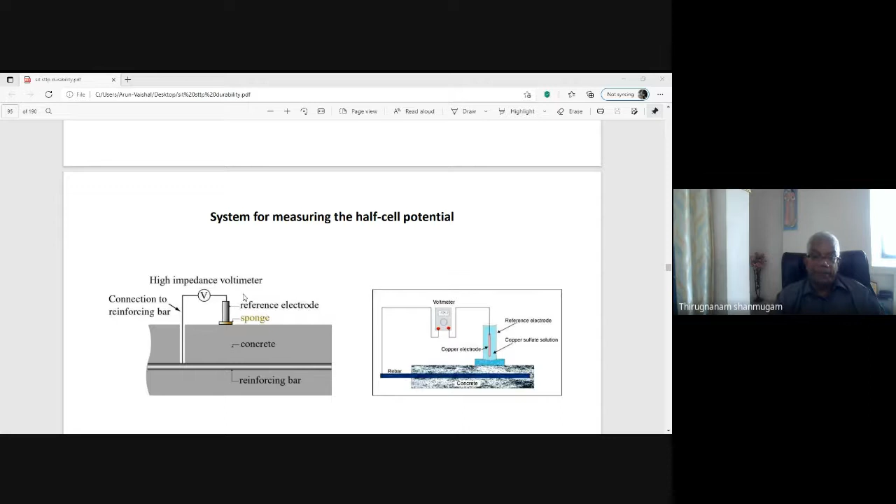Sorry, it is the power part, DC power part. 12 volt current is applied, and it is measured by means of a digital or analog multimeter. One surface is touching the steel surface, and the other is through the half cell.

This consists of a copper electrode and copper sulfate solution, and this copper sulfate solution passes through the concrete electrolyte, completing the electric half cell. Because of this complete cell action, this reading is taking place: 148. 148 means there is no corrosion at all.

Another technique is the impressed voltage technique. This is also an accelerated corrosion test, but here we measure only the current. The variation in development of corrosion current was monitored at regular intervals using a high impedance multimeter, giving the time required to evaluate the relative resistance of the coating material against chloride ingress and subsequent corrosion.

Another test is the applied voltage test. The effect of electrical and electrochemical resistance on the bond of the coating material to steel, and the film integrity of the coating, shall be assessed. A non-conductive plastic material shall be used for the vessel, or for lining a metallic vessel.

The cathode and the anode shall be the reinforcing bar or angle coated with the proposed material. The electrolyte shall be an aqueous solution of 7% NaCl. A potential of 2 volts shall be applied.

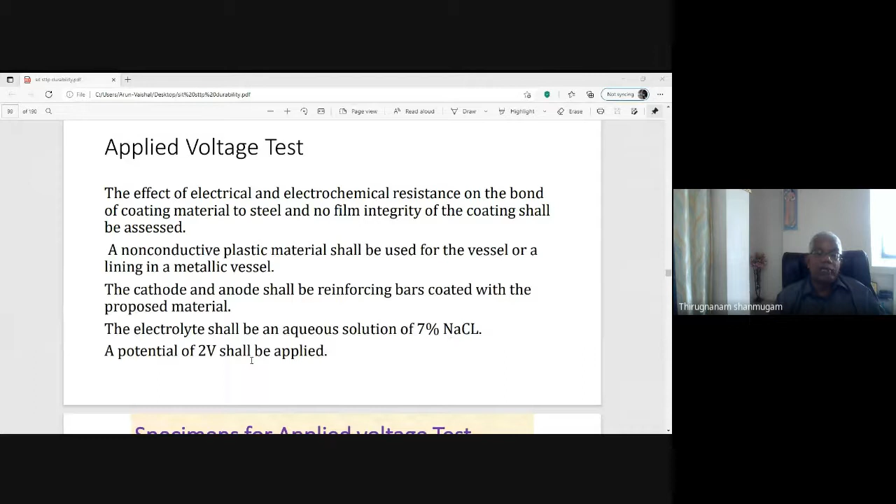For a good coating film, no film failure should be evidenced by evolution of hydrogen gas at the cathode or appearance of corrosion products of iron at the anode during the first hour of testing. So, by application of 2 volt current, if we cannot notice hydrogen gas evolution at the cathode or corrosion products of iron at the anode, it will be a good coating material.

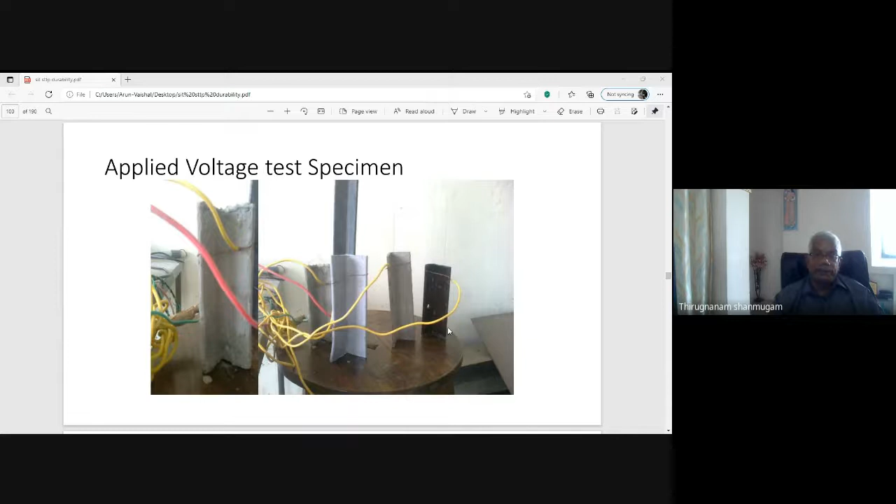So this is the schematic diagram, a pictorial view of the specimens connected to the voltage system. These specimens are inserted in a solution of water, 7% sodium chloride solution, for a particular time.

The chemical resistance setup is evaluated by immersing coated reinforcing steel angles in each of the following: distilled water, 3 molar aqueous solution of calcium chloride, and 3 molar aqueous solution of sodium hydroxide.

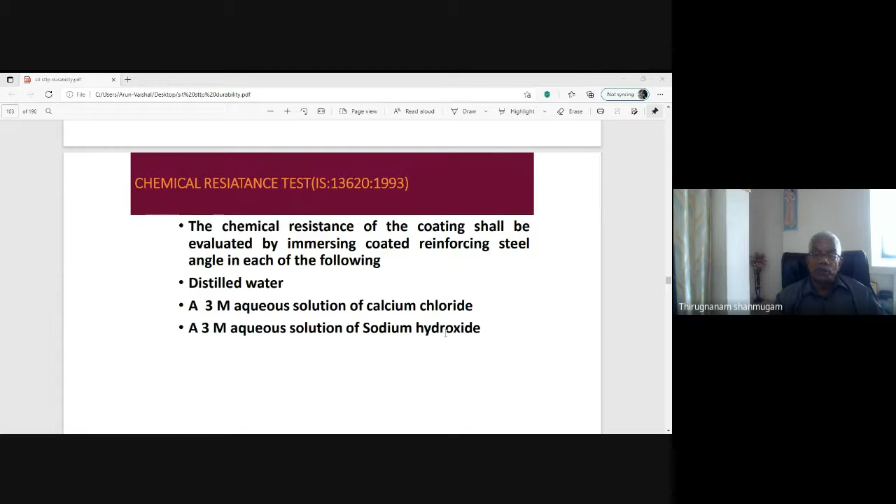So these are the coated angles, immersed in the solution. The result is the performance index point calculated according to the codal practice IS 13620. The code is IS 13620. Performance points are calculated.

You can plot that. Plain uncoated angles have only a performance index of 10, whereas the Demech coating is up to 20 against 3 molar sodium hydroxide solution, and similarly FACSR and CSC cement slurry coated, etc. are also present. The performance of epoxy coating is slightly less.

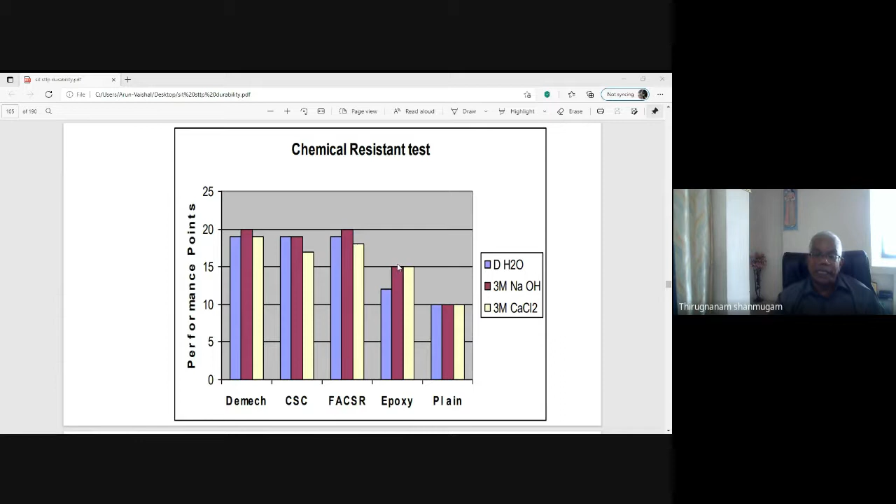That is another investigation with different coatings: plain angle plus plain concrete, plain angle plus admixed concrete, coated angle plus admixed concrete, coated angle plus conventional concrete, plain angle plus conventional concrete plus external coated bar, etc., up to CS10. Different types of variables are available.

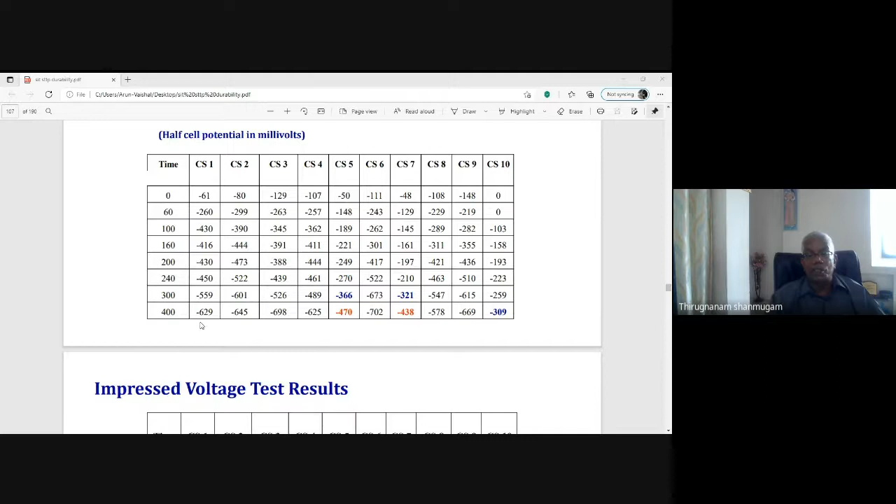Similarly, impressed voltage readings also indicate that coated angles with 2-level or 3-level coating give performance index results as per this. Applied voltage type of coating: 2-level or 3-level coating with cement slurry or chemical coating, epoxy coating, plain angle, or uncoated angle.

Similarly, if epoxy coating is provided, this is restricted to light rust, and a light evolution of hydrogen gas, but it is still present. But for other coatings, with chemical coating or cement slurry coating, there are no corrosion products of iron at the anode level, and no evolution of hydrogen gas at the cathode level, as per the previous indications.

Now a transmission light tower is fabricated as a model, and the 4 legs of the tower foundation are cast. This foundation is subjected to different coating levels - coating to steel, coating to concrete, with admixture concrete, with some modification, etc. It is subjected to accelerated corrosion by dipping into a 3.5% NaCl solution, and with the help of a DC power pack, corrosion is induced.

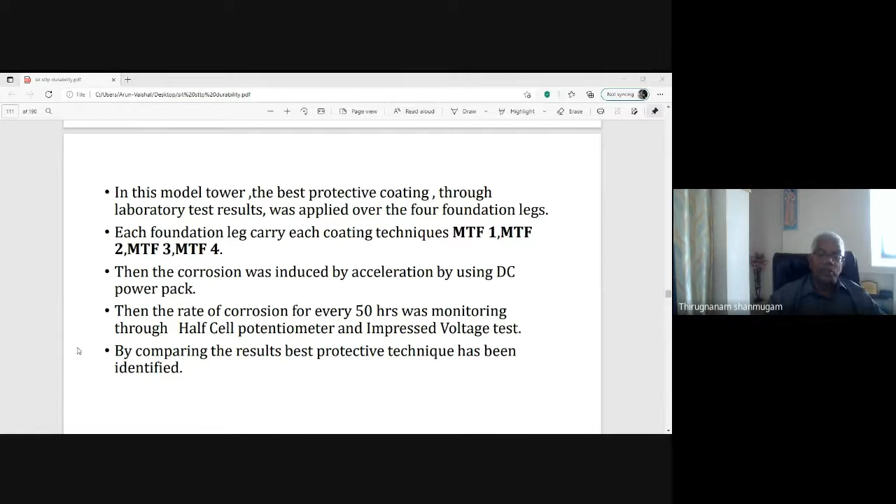In this model tower, the best protective coating identified through laboratory tests was applied over the foundation legs - different coatings MTF 1, 2, 3, 4, etc., representing different coating levels. Corrosion was induced by acceleration using the DC power pack. Rate of corrosion for every 50 hours was monitored through a half-cell potentiometer reading. By comparing the results, the best protective coating technique has been identified.

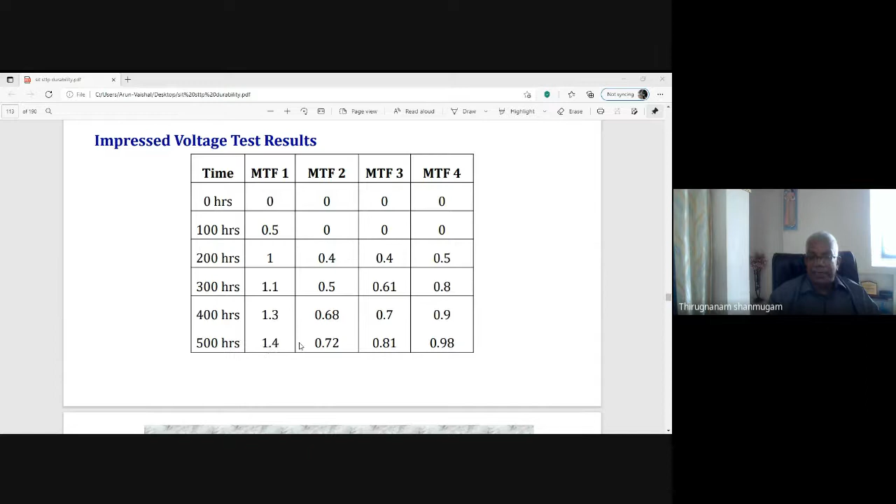Effectiveness of protection: the inclusion of corrosion inhibitor delays the initiation period considerably. 3-level protection for the legs of the model tower exhibits no corrosion even up to 500 hours of accelerated corrosion. The leg coated with nano-zirconium penetrating coating is not at all affected by the corrosion mechanism.

So it is concluded and recommended that there is a need for applying 3-level coatings like polymer-based coating on the stub angle, addition of fly ash by replacing cement by 20%, addition of superplasticizer in the concrete about 1%, and surface coating to the concrete surface by chemical FACSR or Demech or any other coating in the legs of the transmission line tower foundation to increase the durability of the tower foundation.

So in order to increase the durability of the tower foundation, we have to adopt a 3-level coating method. One is coating to the angle, another is coating to the surface of the concrete, and third is durable concrete.

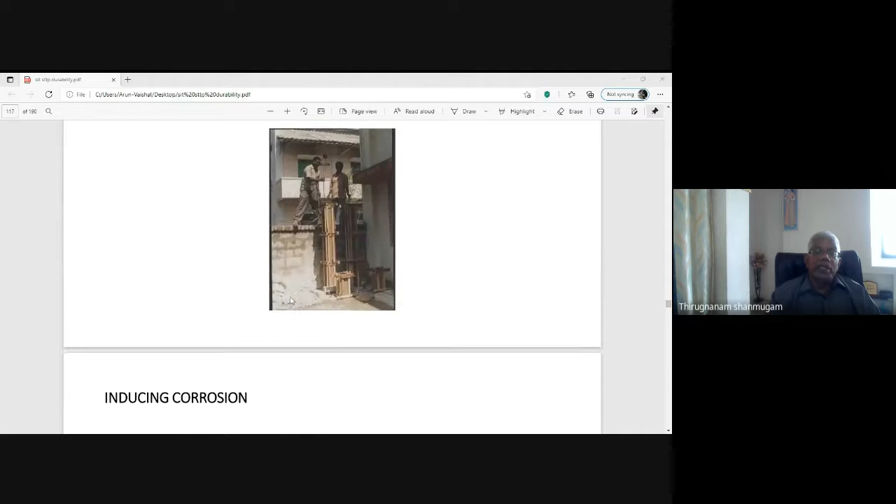Another experimental investigation: a reinforced concrete column is specified and subjected to corrosion in a corrosion chamber. Using a DC power pack, corrosion is induced and rust formation takes place. The reinforcement inside the columns is heavily corroded, with visible leaching of corroded products. After that, the columns are tested in the compression testing machine, both short columns and long columns, to assess the structural behavior of the corroded columns.

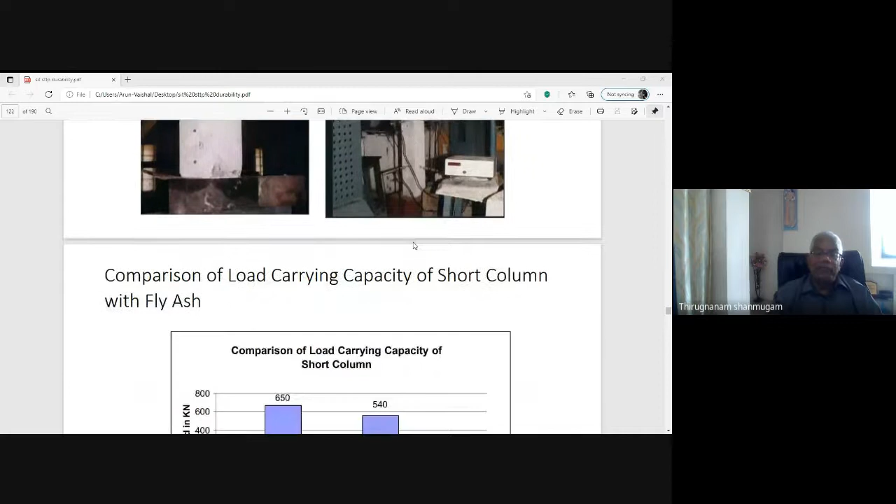This figure shows that the uncorroded column has an ultimate load carrying capacity of 650 kN, whereas the corroded column has only 540 kN. So the load carrying capacity of the column is highly reduced.

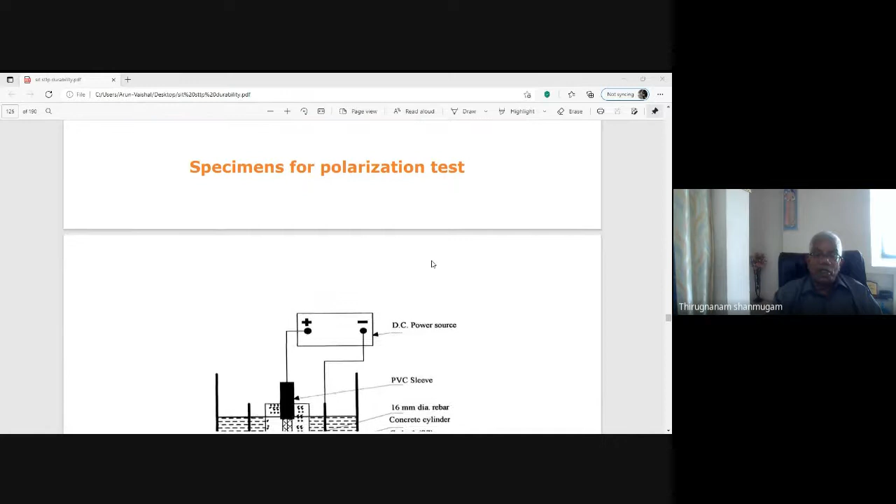Similarly, corrosion of concrete with various admixtures was studied. The concrete consists of various admixtures. Concrete cylindrical specimens with rebars were cast and subjected to an accelerated corrosion setup by inducing EMF, as shown in this pictorial diagram.

Concrete cylinders are placed with a stainless steel plate acting as the cathode, in a conductive sodium chloride solution. The stainless steel plate is connected to the negative terminal of the DC power supply, and the embedded steel reinforcement is connected to the positive terminal. Once you apply 12 volt or 6 volt current, the circuit is completed, and the cathode and anode are affected by the current circulation, causing corrosion to take place.

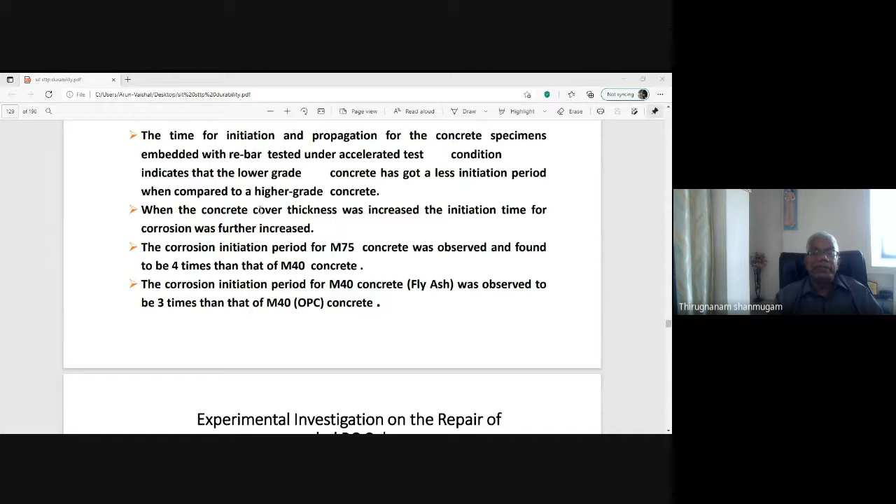The time for initiation and propagation in the concrete specimen embedded with rebar, tested under accelerated conditions, indicates that lower grade concrete has a shorter initiation period. When the concrete cover is increased, the initiation period changes accordingly.

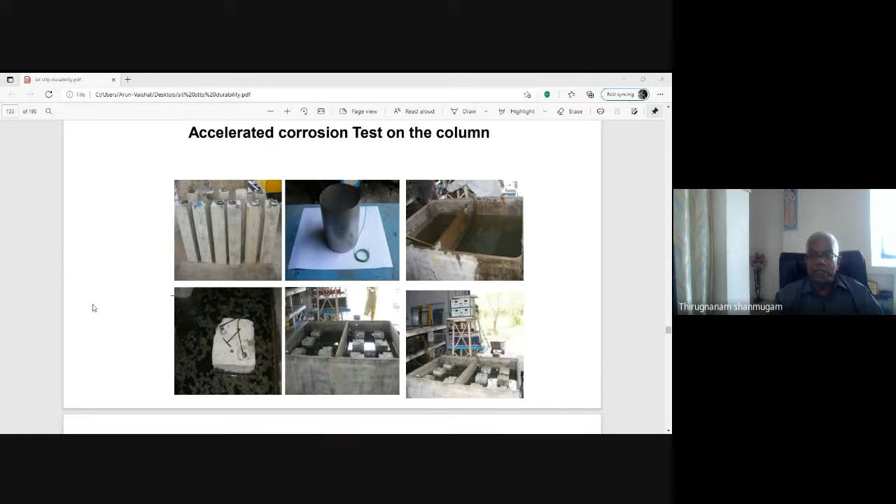Another experimental investigation using the same accelerated corrosion setup. This is the test setup for accelerated corrosion testing. The specimen is placed in the chamber, corrosion is induced, and here is a view of the corroded specimens.

These specimens are tested using non-destructive testing techniques: rebound hammer test, ultrasonic pulse velocity test, half-cell potential test, current readings, crack width measurement, etc.

The void density and imperviousness of the concrete are estimated, along with the strength of the concrete. Both the corroded specimen and the uncorroded specimen indicate more or less the same ultrasonic pulse velocity.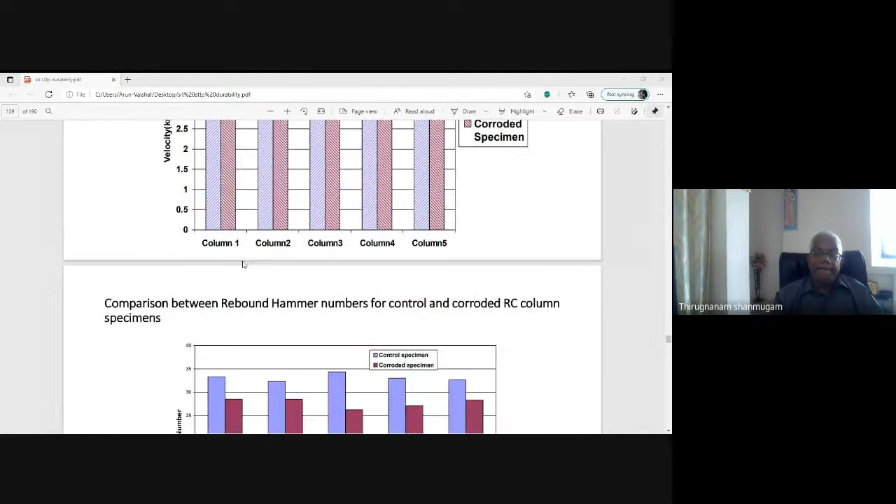The rebound hammer test also shows that the strength is not very much affected by this corrosion, with only about 20% less strength observed.

But the half-cell potentiometer indicates the corrosion damage level, applicable both in the field and laboratory. The half-cell potentiometer reading is indicated on the multimeter.

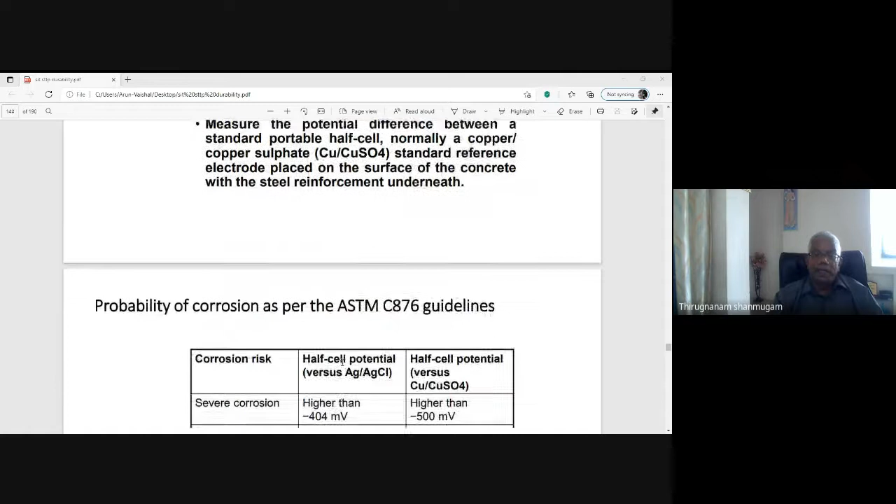As mentioned earlier, severe corrosion is greater than -500 millivolts, high corrosion limit is greater than -350 millivolts, medium corrosion is greater than -200 millivolts, and low corrosion is less than -200 millivolts, with higher positive ranges indicating less corrosion. This is per the ASTM standard. There are two types of electrodes: copper electrode and silver electrode, using copper sulfate solution and silver chloride solution respectively.

The columns may be covered with wrapping, CFRP wrapping or GFRP wrapping, and provided as a strengthened or rehabilitated column. Rehabilitated column means a corrosion-damaged column covered with wrapping. Strengthened column means plain columns covered with wrapping in order to prevent the ingress of water and other things inside the column.

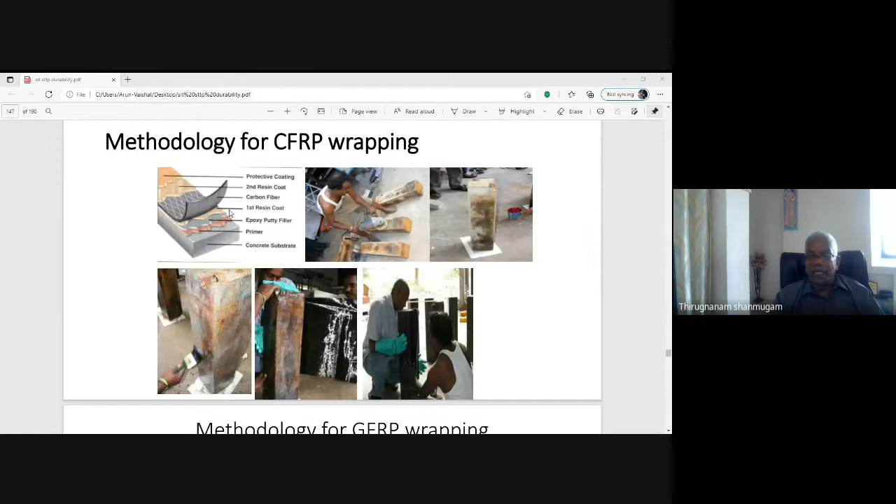This is the methodology of fabricating the wrapping, and there is a load-deflection behavior or stress-strain behavior of the concrete with and without wrapping.

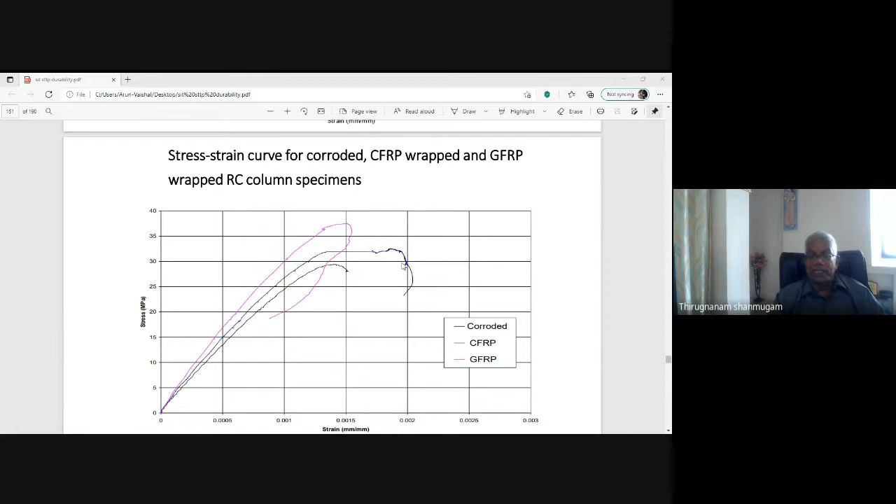For corroded and wrapped columns: corroded column means lower stresses, and wrapped column means higher stresses. These are the damages for the uncorroded columns; if wrapping is provided, then there is no damage to the column.

There is no severe loss in the integrity of the concrete due to corrosion, as the reduction in UPV is only 10%. The wrapping enhanced the axial load characteristic of the corroded RC column, with the increase in the range of about 15%. GFRP shows the same behavior.

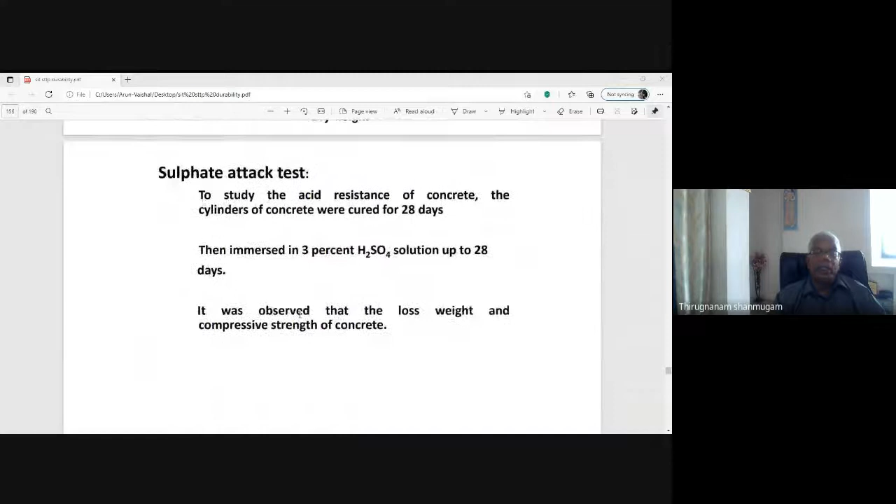Another experimental study was conducted with and without GGBS as a cement replacement material, involving sulfate attack, corrosion attack, and chloride attack solutions. An accelerated corrosion test setup was used to measure half-cell potential values, and pull-out strength was established for both the corroded and uncorroded columns, along with the failure pattern.

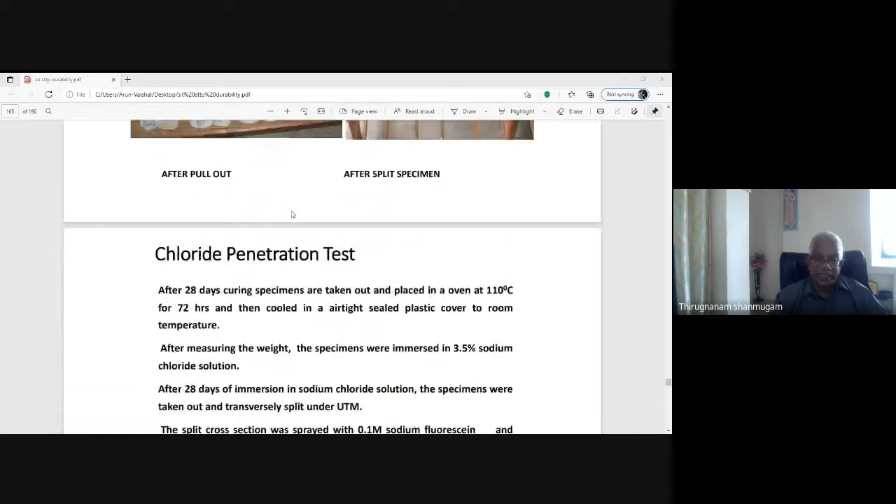Chloride RCPT test or chloride penetration test is another test performed, which is not the RCPT test but penetration by means of a chloride solution. So it is indicated by means of this solution, and applying the solution, the color indication gives these values.

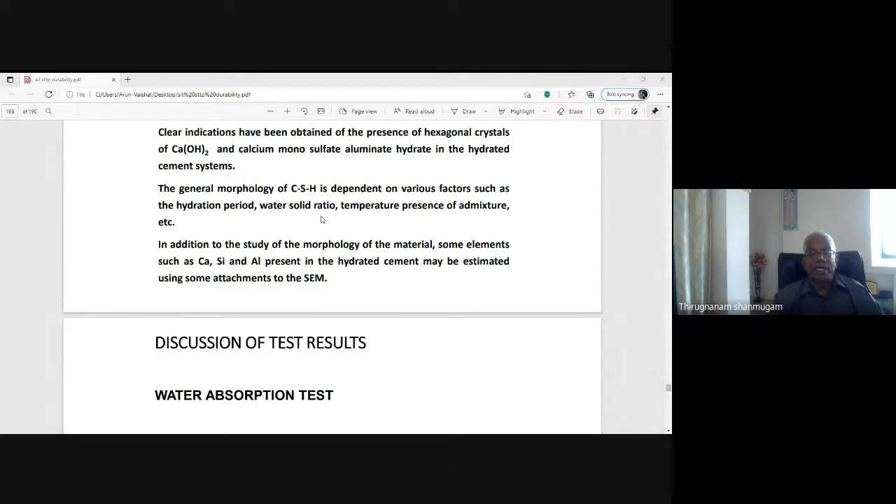Scanning electron microscope imaging of the failure surface was carried out. Clear indication was obtained with the presence of hexagonal crystals of calcium hydroxide and calcium monosulfate aluminate hydrate in the hydrated cement system. The general morphology of calcium silicate hydrate gel is dependent on various factors such as hydration period, water solid ratio, etc.

The discussion of the results was performed the same way with G20, meaning admixture concrete, where G means GGBS solution. This automatically gives a good durable concrete in all respects. So for the durability of concrete, you have to add some supplementary cementitious material, just as fly ash, GGBS, or microsilica.

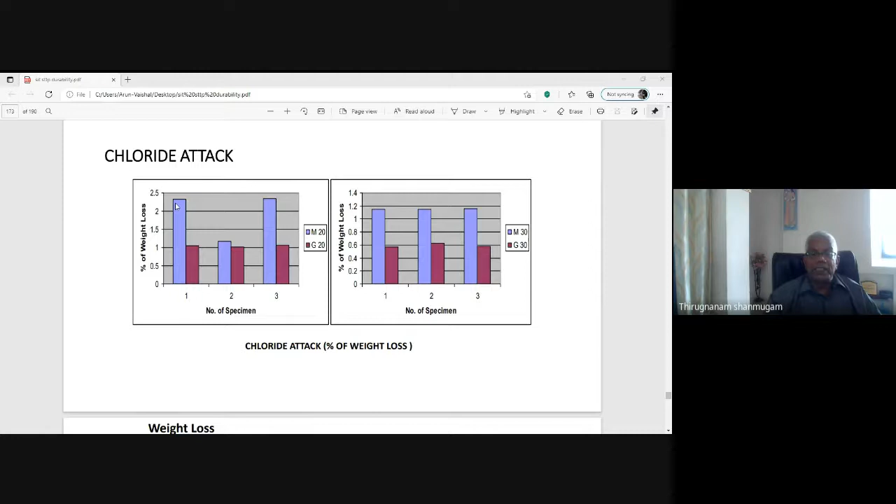This has a very significant effect on chloride attack, comparing M20 concrete and M30 concrete. The lower grade concrete subjected to this shows a higher percentage of weight loss, whereas here the percentage of weight loss is lower.

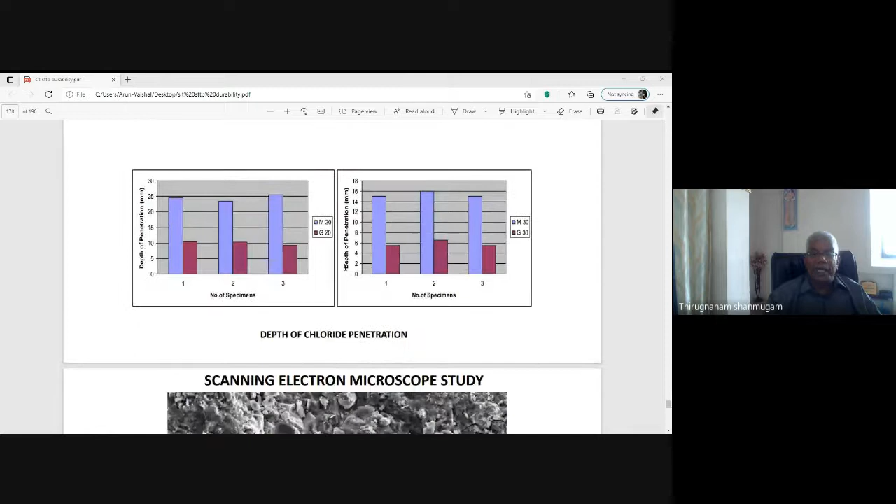Scanning electron microscope images show magnification up to 500 or 2000. This is for G20 and this is for M20. At 2000 magnification, you can notice the formation of CSH gel for M20 concrete as well as for the G20 admixture concrete.

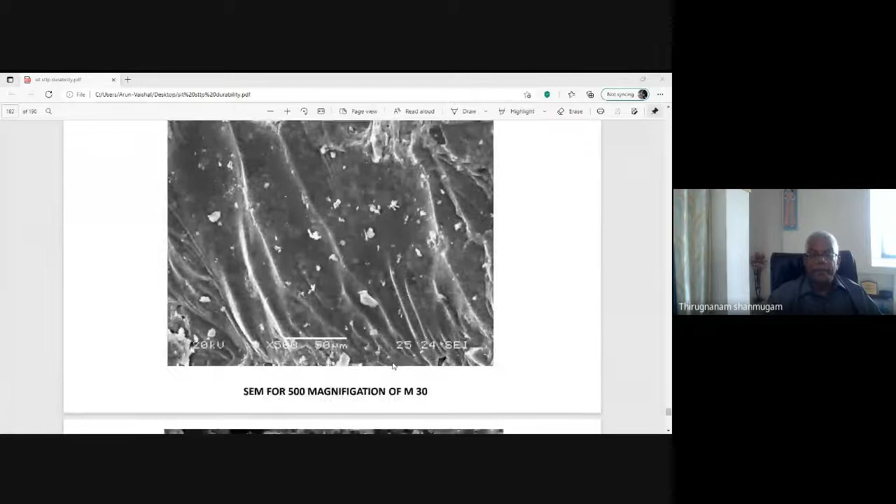Comparing these two figures, the black holes are voids. Here the voids are very limited and the gel formation is very high, up to the maximum percentage. This is for M30 concrete, high strength concrete, and G30 concrete at 2000 magnification showing gel formation like this.

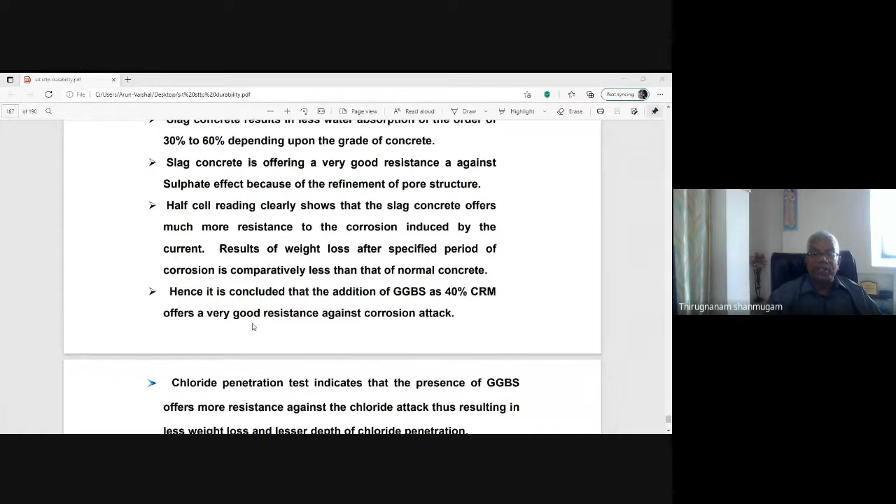Based on this, the conclusion is that slag concrete offers very good resistance against sulfate effect because of the refinement of the pore structure. Half-cell reading clearly shows that slag concrete offers much more resistance to corrosion induced by current. So we can conclude that the addition of GGBS as 40% cement replacement material offers very good resistance against corrosion attack.

Chloride penetration test indicates the presence of GGBS offers more resistance against chloride attack, resulting in less weight loss. The photographs taken by the SEM technique clearly show that the structure of slag concrete is non-porous, containing more gel formation.

Because of this, properties such as density and strength have been much improved. At the same time, durability properties such as water absorption and chemical attack are much reduced. The effect of GGBS is more in M30 grade concrete as compared to M20 concrete, so higher grade concrete will exhibit more durable concrete.

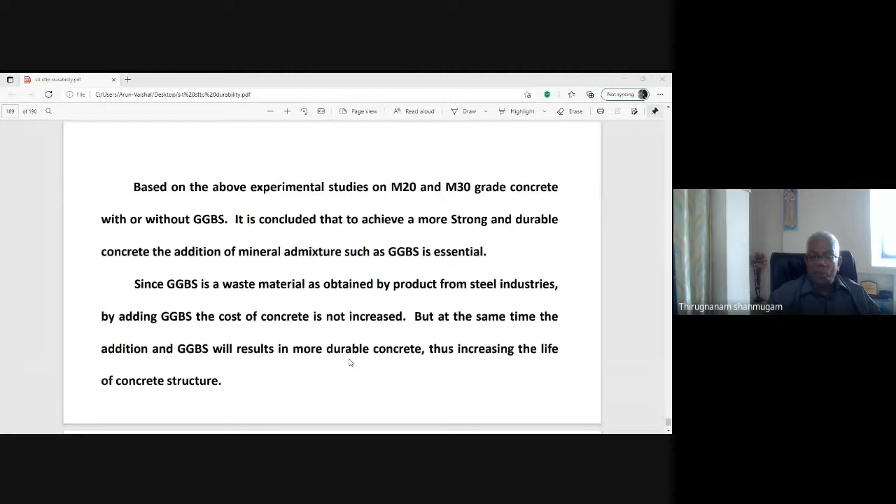Based on this, it is concluded that to achieve stronger and more durable concrete, the addition of mineral admixture such as GGBS is essential. It is a waste material obtained from the steel industries, with no cost, but the addition of GGBS results in more durable concrete, thus increasing the life of concrete structures.

So for obtaining durable concrete, you have to adopt supplementary cementitious material, low water-cement ratio, good quality of concrete, and coating methods or corrosion control methods, etc. This will ensure durable concrete and enhance the life of the concrete.